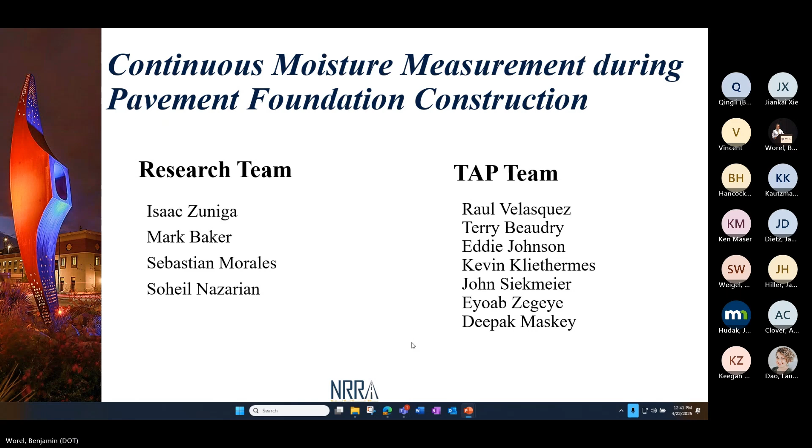Okay, sure. So given that background, our goal was to just put together a breadboard of a device, and this is not even a prototype. Breadboard is before prototype, right? A device that continuously measures moisture during pavement foundation construction. A good example of that is basically the asphalt roller density measurement device, which is very common now for asphalt. The same concept.

So there are several current pieces of equipment. These do a good job of telling you if you have moisture or do not have moisture. But keep in mind when we are building a base or a subgrade, we are talking about 1%, 2%. We are not talking about wet or dry. These are available, and they use them in agriculture quite a bit, but they were not giving us the accuracy that we need.

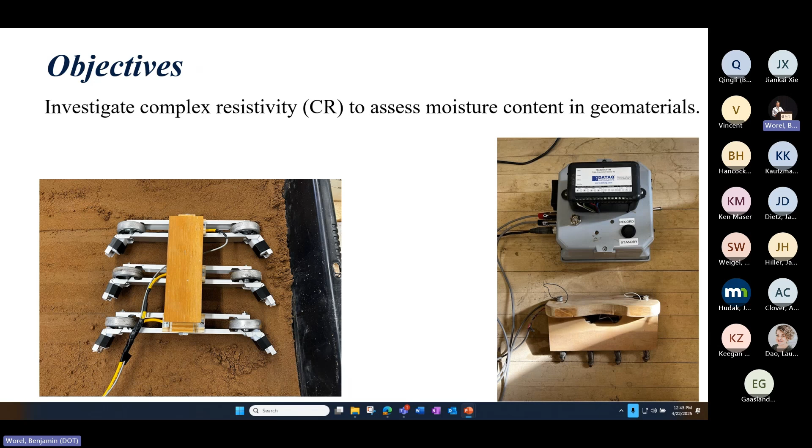So we started looking at something called complex resistivity. Resistivity, I guess, is available, but it's complex resistivity we measure. And when I say breadboard, that's what it is. These are low-cost equipment. That one is the laboratory setup to calibrate, and this is the field rolling system that we put together to see how it's going to go. Why complex resistivity?

It's basically a proxy for stiffness and moisture, because we know that moisture changes stiffness. So that's one good thing. We have a lot of experience with resistivity into the embankments and things like that.

I guess I promised not to show you equations. The fundamental equation of the moisture suction and complex resistivity is essentially the same differential equation. We're not going to solve it today, but the same principle that controls the moisture suction we want to know is the same principle that works with the complex resistivity. So if you know the degree of saturation, you can do a lot of good things, but it's not easy to measure. So what is it?

Those guys who do the master curves in asphalt, please wake up. What we are doing is basically injecting electricity into the ground, and we measure two things, the magnitude and phase. Does that sound familiar, master curve? What we would do is just change the frequency and follow the phase and the amplitude, the magnitude that we are getting from the resistivity.

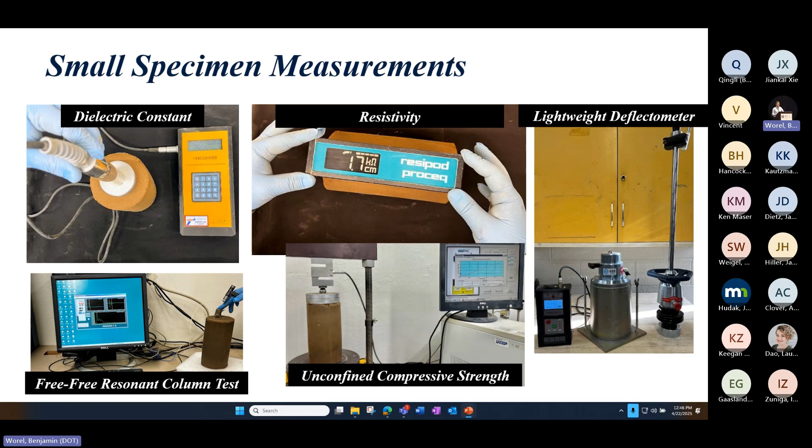So we prepared moisture density curve specimens at different moisture contents, and we just ran a resonant column for the modulus and then unconfined compressive strength. And then John Siekmeier showed up and said, why don't you look at the LWD as well? So we did that - that one has a different size specimen, a 6-inch by 8-inch specimen. Then just to simulate the field, we started making these drums and built materials within it, so it's a different compaction method, so that we can prototype it in the laboratory.

We got 6 different soils: 2 clays, 2 sands, and 2 gravels, and as you see, they are diversified. Plus, we started mixing one of the clays and one of the sands to see what the proportion does to the relationship, because when the soil is contaminated, you have to look at it. So this is what it showed.

We were not very happy with the dielectric constant - it basically relates a lot on the contact area, and these are triplicate specimens, so we are getting dispersion in the results. You see there's a nice relationship, but it vastly varies depending on the type of material you have. So there is not one relationship, but nevertheless they're related. The only one where we could not get good results was the gravel because of the size of the aggregates and the size of the specimen.

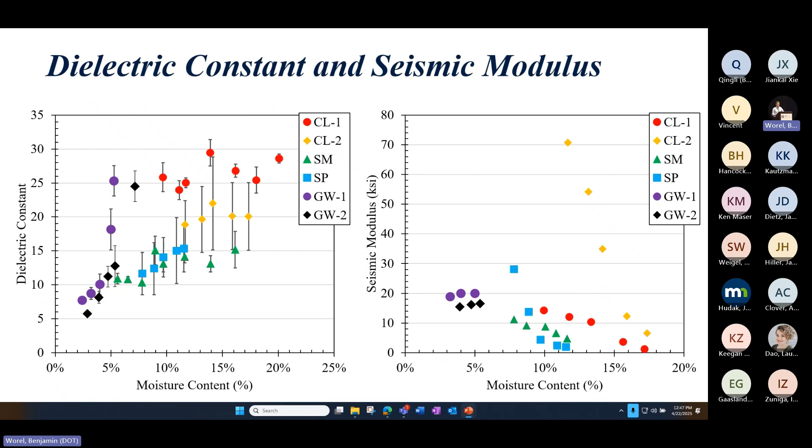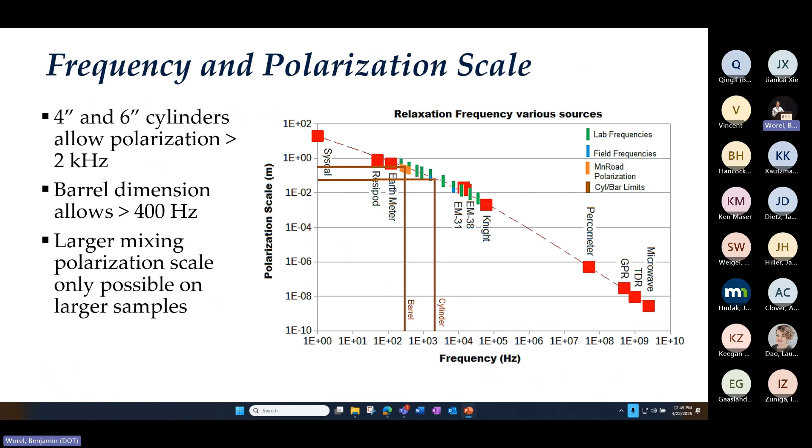It's basically, again, the master curve guys - what happens is the relaxation frequency is significantly different depending on the size. For the clays, they were long, and for the sands we were making 4x8, they were long enough that we would see a little bit of end effect. When we went to 6x8 for the gravel, we started to see that end effect. This is something trying to explain why the difference is there, and this is the theory we use to come up with a correction factor to go from the lab to the field.

The next thing, again, the inspiration was some of the work that Rosemary Knight did in geophysics. We want to go to the suction or degree of saturation. There's always a pesky thing: to get the degree of saturation, you need the specific gravity of the material. It's very difficult to get the right number, and if you don't, then you have a problem.

So we came up with a normalization. We call it the poor man's version of the degree of saturation. On the x-axis, normalized moisture content is the actual moisture content minus the OMC, divided by OMC, optimal moisture content. We did the same thing with the modulus or the resistivity: resistivity at a given moisture content divided by the resistivity at the optimal moisture content.

That was very good, because we can start collapsing the different types of material into one curve. So you always see that at 0 normalized is the OMC, you always get 1, and then you see that they're relatively collapsing into one curve.

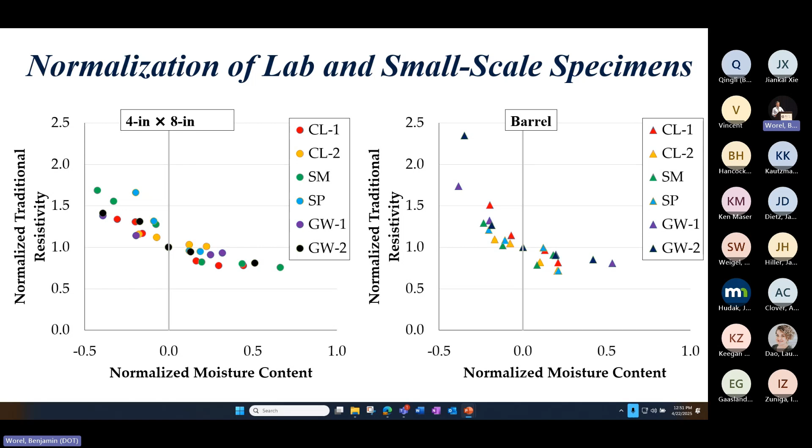Now I have the normalized traditional versus the normalized barrel. The shape is reasonably the same, so I can do some local calibration in the field after I get the numbers in the lab, and then I can predict the moisture content.

So what happened next? We went to the field with this, the first version, and we were not very happy with it. Then we built the second version, and we were a little bit more happy with it. But we have a problem here—we got a little disappointed.

What is the problem? Because of the distances, we want to see lift-specific moisture content—you don't want to see meters of soil. We have to have a small contact area. And when you go to the real construction, the contact area is rough there and so on, and we could not get it.

So we saw a lot of polarization, and the directions we anticipated, we really didn't like. That's what we were doing. The trends are there, but going to 1 or 2%, we could not see it.

So we started doing some diagnostics to see what it is. The electric contact was good—so I'm putting electricity in—but the contact area is very variable. So now the focus is different.

So we looked at different directions and speed and so on. One thing we saw at MnROAD, they are using RAP—they're putting 25% or 20% RAP in the mix.

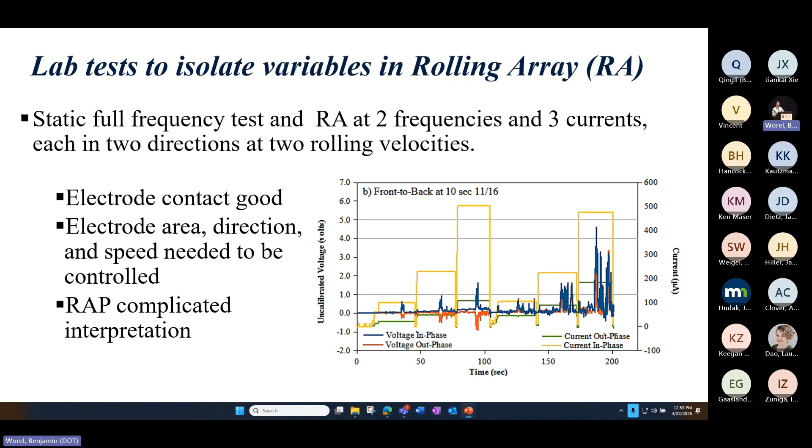So we have a problem. This worked great in the laboratory, but you go to the field and you have a problem. We did a lot of diagnostics afterwards. We were not too embarrassed to come and say, give us a phase 2—you only have one chance to make a good impression. So we did a lot of work trying to see what's there.

We concluded that if we make the wheel configurations bigger, we would not see the top layer alone. Or we could go smaller contact for the distances we need, but then we cannot get even pressure and even factor. So we started looking at some of the alternatives, and basically decided the way to go is to measure the capacitance.

Mark moved to Alaska, he retired, so he has plenty of free time during the winter, and we're just trying to revive it again. Sorry to be optimistic at the beginning and pessimistic now, but hey, it's good to know your limitations. Hopefully we're going to have a prototype to see what we can do.

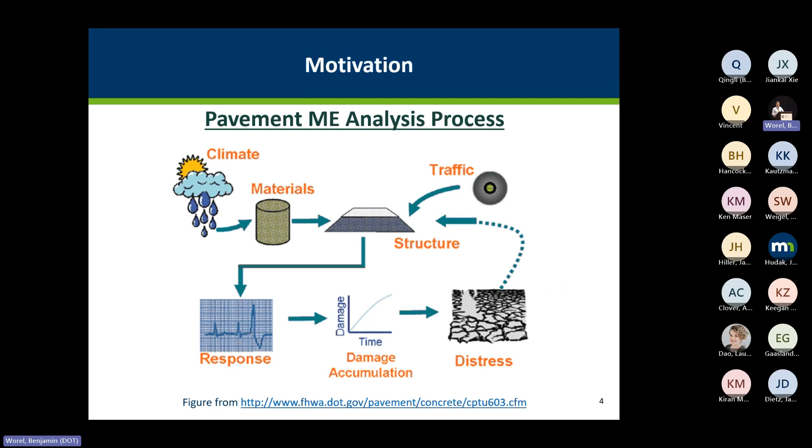The main material input in this study we focused on is the base layer, base course layers. So we collected whatever information that we can find out there that can be used as an input in pavement base course systems. The two specific ranges of materials we'll focus on are recycled concrete aggregate and reclaimed asphalt pavement materials, or recycled asphalt pavement material.

And these are the input data that we try to collect. As you can see, resilient modulus is one of the main inputs that needs to be used, and California bearing ratio, permanent deformation, shear strength parameters, and hydraulic conductivity.

And it was surprising to find out that there is not enough hydraulic conductivity data on these base materials, so we didn't really get much information on that. But index parameters we wanted to look into as well, because we tried to correlate these index parameters to shear strength and stiffness parameters, so it would be useful for pavement designs.

And we had two goals. The first one is really the collection of this material input. So we've gone through almost 80 reports or journal articles and all that, to extract all the information that had somewhat the data we were looking for.

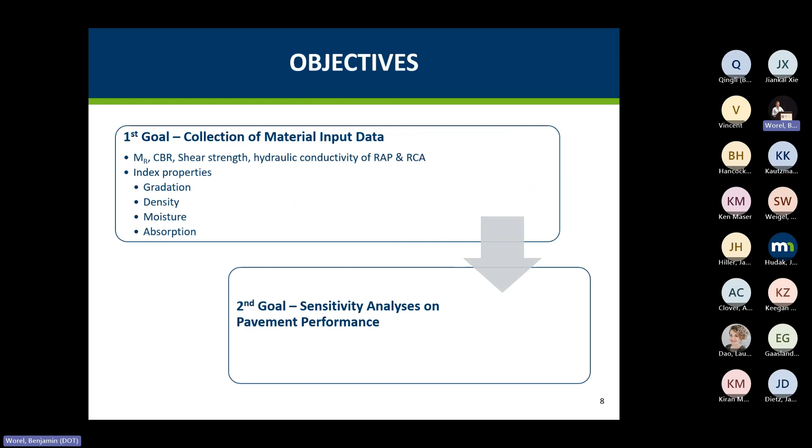Again, these are the list of parameters. At that time, when we were doing this project between 2020 and 2021, these were the states that were involved. Now it's expanded much more than that, so congrats to the NRRA executive team for expanding DOT participation.

And a lot of data here. Basically we've gone through all these 80-some reports, journal articles and all that, and tried to come up with lower limits for gravel, sand, fines contents, and related the minimum, lower, median, and upper limits for the resilient modulus test data, and also some other data like CBR. People ran a lot of tests on this and reported a lot of information, so what was that upper limit, lower limit, and median data for that.

So sometimes agencies or designers may not have all this data, so they can just go to this summary table and pick the number there, and it would give some sort of idea. Still, it wouldn't be perfect, but it would give you a database that you can pick numbers from.

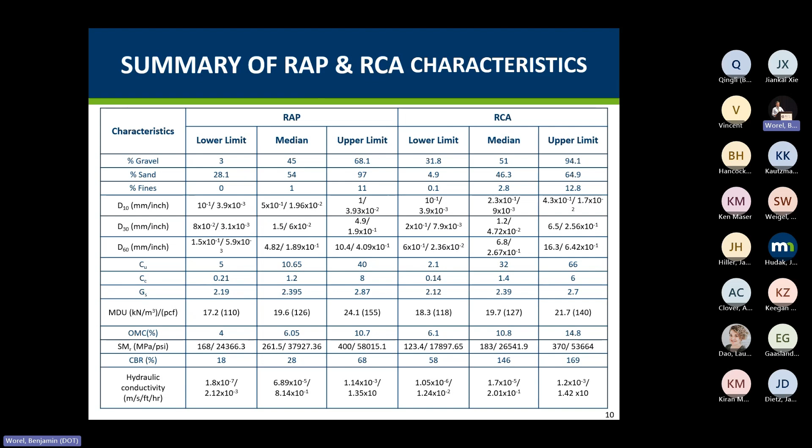We wanted to specifically focus on the resilient modulus data, and as you can see, the majority of people in this room know resilient modulus is a stress-dependent characteristic. So the soil doesn't have one resilient modulus value - you run these tests on different loading sequences and get this bulk stress versus resilient modulus data.

And of course, you can't put all this data as a whole into your Pavement ME design. You need a single value called the summary resilient modulus value, and for the base layers, what we use is the 210 kilopascal - that arrow shifted, sorry, it should be a little further to the right - it's 210 kilopascal, which equals 30 psi of bulk stress that corresponds to the resilient modulus value.

This is called the summary resilient modulus for your base design, and that's the MR value that you use as an input in your pavement design analysis.

So in this project, what we tried to do is correlate how this summary resilient modulus value changes with index characteristics. So can we get any relationship or some sort of correlation?

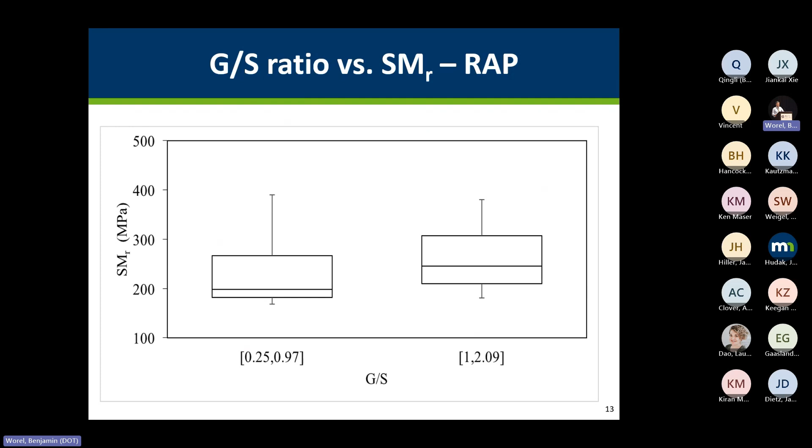And we plot these types of graphs - gravel to sand ratio versus summary resilient modulus value - and try to box it, to see, if the gravel to sand ratio is within this range on the left, the median value you would use is 200 megapascal. And if it's between this range, 1 and 2.09, this is the median value you would use - it gives you an idea. Again, I'm not saying you can use this as a perfect input and solve your problem, but this would give you a starting point and a good idea of where your input may work depending on your gravel to sand ratio.

Similar thing where we try to get the similar information for RCA material as well. And again, these are some of the ranges for RCA gravel to sand ratio versus resilient modulus. And again, D60, we did the same thing. These are the ranges that we provide, D60 versus resilient modulus value for RAP material, and similar thing that we did for the RCA material as well. As you can see, these are the ranges that can be helpful for you to pick your input value.

Unfortunately, we couldn't really find amazing trend lines showing that with an increase in D60 you get higher MR or gravel to sand ratio. It just doesn't work. So instead, we try to give these brackets. If your index parameter is in this range, this is the range of resilient modulus value that you would expect.

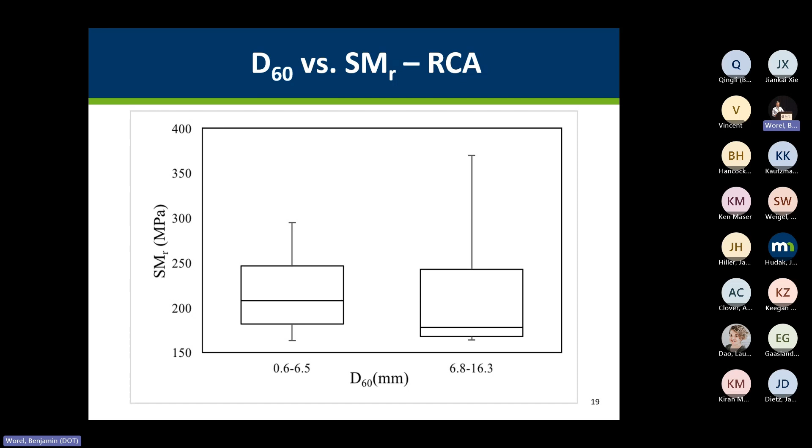And a lot of data, a lot of summary there. And we've done this for many other index properties and other soil characteristics. But if I put all those plots, it will take 50 minutes to go through all those graphs. So at the end of the day, just as a summary, index properties: in general, if you have higher D effective diameter size and gravel to sand ratio, it is likely to have higher resilient modulus value.

Of course, fines content, surprisingly in the RAP material, didn't seem to have much impact. I think the main reason is RAPs don't have much fines anyway, so the data that we had didn't really clarify. It's not like we changed the fines content periodically ourselves and ran the test. From the literature, we collected all this fines content data along with their corresponding resilient modulus data, and it didn't seem to affect. So with RAP, I think fines content is not that big of an issue based on our data. And again, these are some of the things. I won't go over all of them one by one.

Similar trends were observed with the recycled concrete aggregate with the gravel to sand ratio, so high resilient modulus. But with RCA, fines content can be a challenge. With an increase in fines content, you see a significant decrease in the resilient modulus values. One other thing with the RCA: when you increase the RCA content within your pavement foundation layer, it tends to decrease the hydraulic conductivity, and it can be an issue depending on what type of conditions you have. So that's what the study found out.

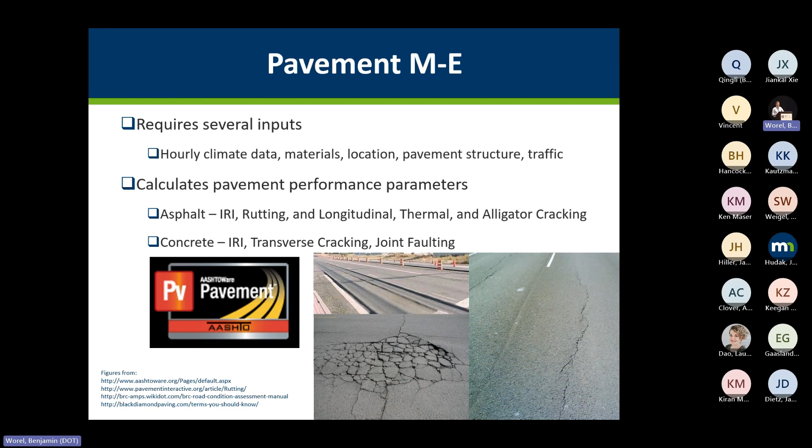These are the performance parameters that we looked into, and these are the general inputs that we used. We checked these inputs with our TAP members as well, and we thought this might be representative of the NRRA DOT participants at that time. These are the other traffic inputs that we used, the low traffic values based on our discussion with TAP and also previous literature. When people do sensitivity analysis, they run their tests within these traffic ranges.

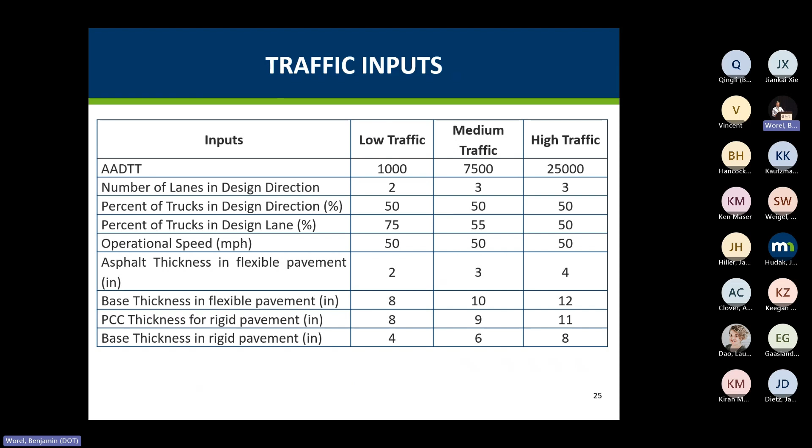These next few slides are a bunch of graphs that show the impact of resilient modulus variation on flexible pavements. Of course, low traffic had the least impact. An increase in traffic caused an increase in the deformation and the distresses. One thing that was surprising, especially in the low traffic conditions, IRI didn't seem to be impacted much when you use the RAP, and the stiffness of the RAP didn't seem to be impacting the IRI values much.

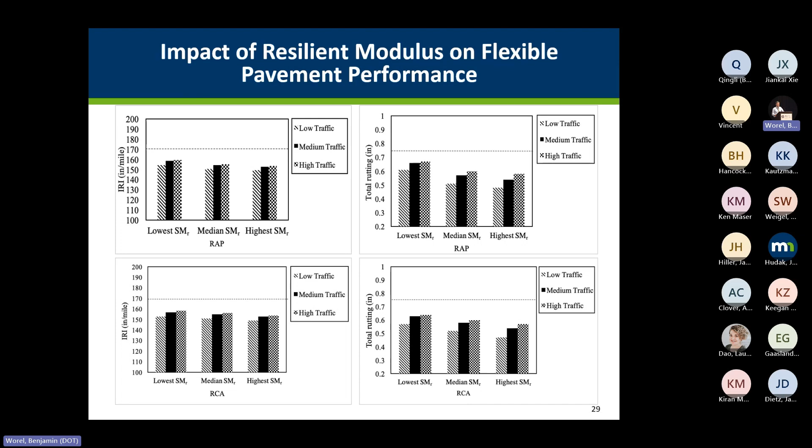And with the total rutting, depending on the conditions, we see a lower trend with an increase in SMR. We saw a slight decrease in the total rutting, and RCA had similar trends. The similar analysis we conducted for the impact of resilient modulus on rigid pavement performance. Again, traffic, of course, makes sense. An increase in the traffic increases the distresses. No brainer there.

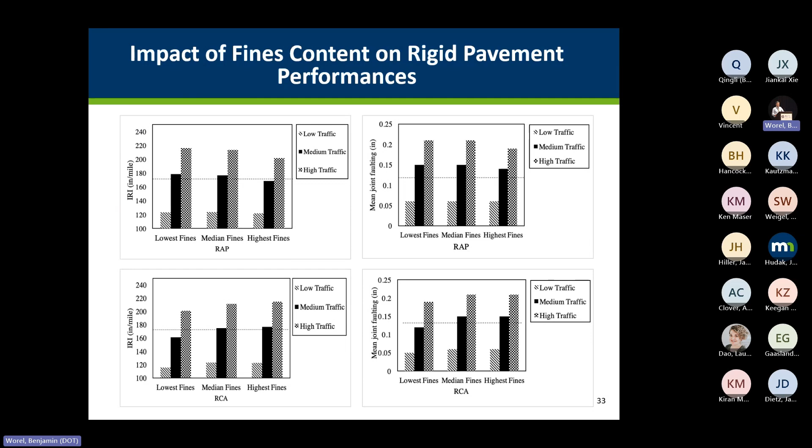And the same thing with the rigid pavement performance, both for the RAP and RCA material, an increase in fines content in general caused a reduction in the IRI and mean joint faulting performance. Overall, these are some of the lessons that we learned. I didn't provide all the data here. Fines content was one of the most impactful parameters in the pavement distress predictions. And surprisingly, of the index properties, D60 was definitely not providing any trend, and some other index properties didn't seem to impact it as much either.

These are some of the implementations. Actually, we have a recent project funded by MnDOT LRRB looking into the second item there, to recommend and determine the gradations and summary resilient modulus values, along with drainage and other things that need to be taken care of and studied in more detail. So these were some of the analyses, and the rigid pavement results were not conclusive. Ben may have a much better idea about it. Again, a rich database was created, so it was a good start to give guidance to pavement engineers.

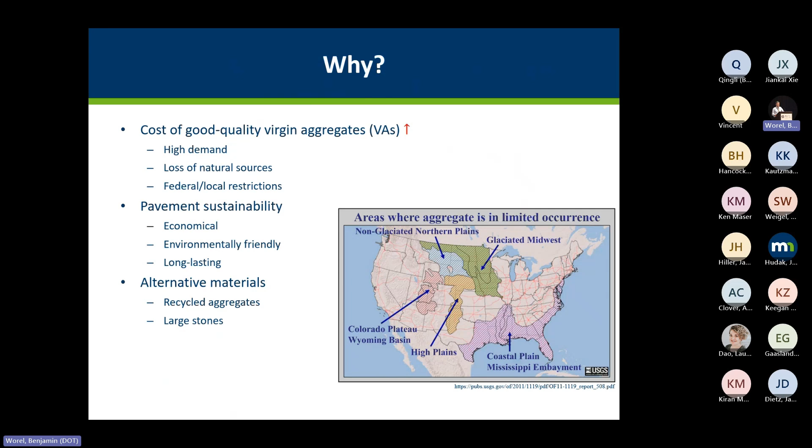And with this, competition comes. It's not only pavement engineers using the aggregates, also construction engineers, buildings, dam constructions, bridge constructions. Everybody needs this aggregate. The sources are scarce, and competition is high, so they are getting more expensive. The use of recycled materials definitely makes sense to replace some of that demand.

As a result of this, three materials were the focus of this project. The first one is recycled concrete aggregate, and the second one was recycled asphalt pavement. In addition to the laboratory tests, we built test sites on MnROAD to monitor their performance for a long period of time.

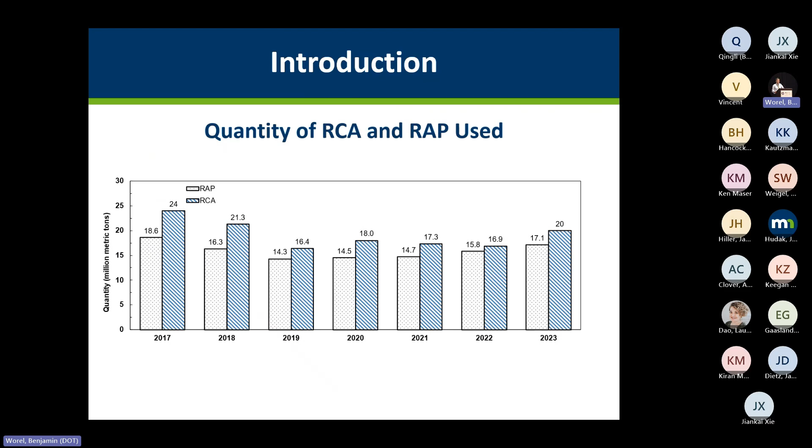So you have a lot of competitions, but especially if you want to use it in the pavement systems, you really need to understand their limitations, so how they can be used. Can they be used just like we use the natural aggregates? And again, at that time there was information, but it wasn't as specific as what we've done in this study. And there were some limitations of the laboratory facilities, especially with large stone subbases, how to determine their gradations and their performances and all that. So this study tried to answer all those unknowns.

And we had a total of 11 test sites. These are the recycled aggregate bases. We have 12-inch thick coarse RCA material, meaning the gradation of this RCA was coarser. And then we had the 12-inch thick fine RCA; the gradation of these RCAs was finer. And then limestone is a natural quarried aggregate that we use, no RCAs or anything. And RCA RAP was another 12-inch thick material that is a mix of RCA and RAP materials.

And class 6 aggregate, and especially class 5Q, has a lot of RCA in it too, but it is called class 5Q and class 6 aggregates by MnDOT, Minnesota DOT. Then we have our 18-inch thick large stone subbases and 9-inch thick large stone subbases, and 4 of these 9-inch thick large stone subbases had biaxial geogrid, biaxial geogrid plus geotextile, triaxial geogrid plus geotextile, and triaxial geogrids.

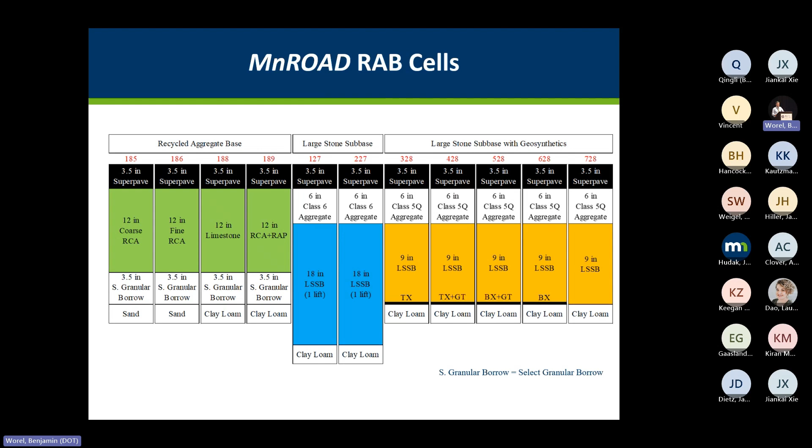Again, I'm not sure if I will have enough time to cover how geosynthetics are put in between, why it is decided to put geosynthetics between large stone subbase and subgrade, but happy to talk about it during the break.

We have three main goals. The first one was really to start with the field performance. Usually we start with lab, but the project was built before we started running the laboratory tests. So we started with the construction field performance, then determined the index properties of these materials, and then prepared a pavement design and construction specification guideline based on the outcome we got from these two main goals.

Again, the content of the project was quite big, and today I will mainly talk briefly about construction monitoring and laboratory testing, and long-term performance monitoring. We still have these test sites, thanks to MnDOT and Ben for not getting rid of them. They are still collecting the data, so we have data from the last 8 years, which is not very possible if you don't have such sites in MnDOT. So it's really showing us the long-term performance of these materials. And we'll talk about instrumentation a little bit. Probably I won't have time to talk about the pavement design criteria.

So these are the list of the laboratory tests that we have conducted: index properties, saturated and unsaturated properties, thanks to my colleagues at University of Wisconsin, Dr. Likos and Dr. Edil. Unfortunately, I won't be able to touch base on the permeability and unsaturated results in today's presentation. And we have developed an imaging tool that you can use to determine the gradation of large stone subbase materials and also their angularity and sphericity.

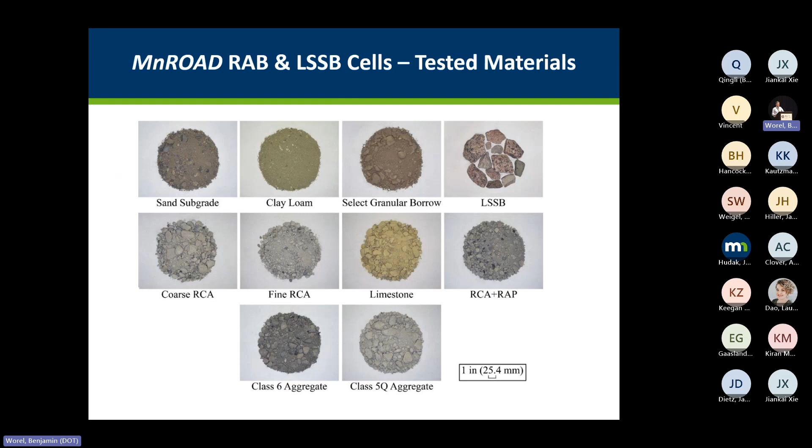And these are the pictures of the materials that we have tested and used. A wide variety of materials, and LSSB, as you can see, is a very coarse large stone subbase, and the other materials are pretty much the same, except of course the clay loam subgrade and sand subgrade have different gradations. There is a lot of information here; except the clay soil and the large stone subbase, the gradation of the materials was within the acceptable criteria to be used as a base layer in pavement foundation systems. And again, we have a whole paper on this gyratory compaction, but I won't show any results.

One of the things that we observed, especially with coarse RCA and RCA RAP materials, is that compaction is important. If you try to reach that 95% compaction degree, these RCA materials change their original gradation significantly. So that's one thing that needs to be studied further. Really, what should that adequate compaction degree be?

Because especially with coarse RCA, we saw this. When you apply this compaction on it, it really changes the original gradation significantly. So that part is very important.

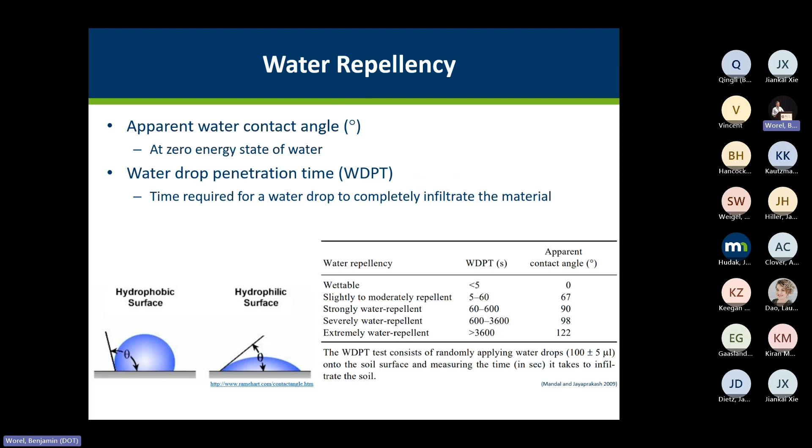And water repellency: with my great colleague, Dr. Daniels, we have a whole project on making the soil hydrophobic. Basically, we don't use Rain-X, but whatever Rain-X does on a car windshield, we do it on a soil with an organosilane chemical. We put it on a soil and it makes the soil basically hydrophobic, water repellent. But with RCA and RAP, we also wanted to look into this. Are they hydrophilic or hydrophobic? Because depending on that, the gradation and the permeability of these materials may change significantly.

And what are the lessons learned from laboratory testing? The majority of these materials that we use are non-plastic A-1-a materials that fit the gradation requirement that you can use in pavement foundation systems. But absorption was the highest with RCA materials as expected, and the finer the RCA, the higher the absorption. And actually, I don't know if I put it in these slides, but for absorption, we put a limit on the absorption value. If it is outside of those ranges, this study recommended not to use those RCAs.

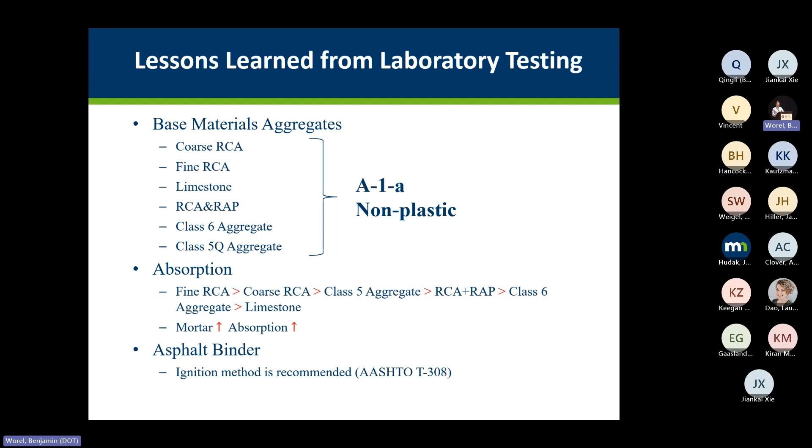And with the asphalt binder test, the ignition method was the recommended one to really get the actual RAP material. Again, I couldn't show the results here, but Class 6 and Class 5Q had recycled materials in them. They had similar properties: Class 6 aggregate had more similarity to RCA RAP, and Class 5Q had more similarity to the coarse RCA. And we didn't get to this, but the hydraulic conductivity of the coarse RCA, fine RCA, and RCA RAP was higher than the limestone.

But this was before you apply all the traffic load and all that. I think with this new study coming, we will look into the long-term hydraulic conductivity changes of these materials as well. And for the abrasion limit, when you use RCAs, the abrasion value increases a little bit. And again, we observed higher abrasion for recycled concrete aggregates.

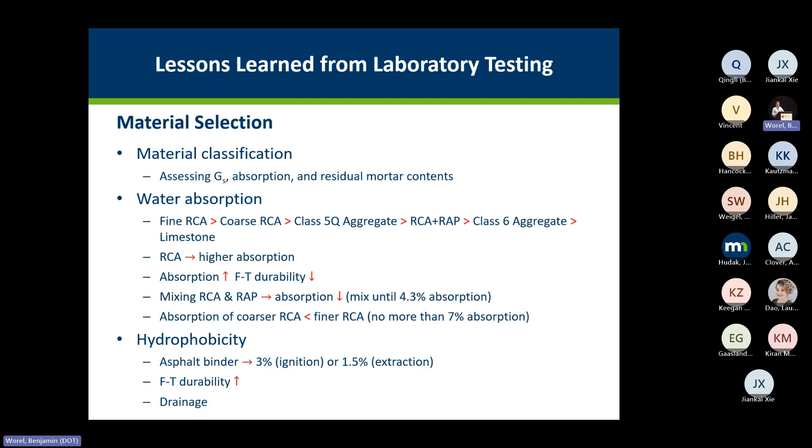And again, water absorption is one of the parameters that we really wanted to focus on. That needs to be limited, as we mentioned, with RCA and RAP. We wanted to keep that absorption value below 4.3%. And for coarse RCA or fine RCA, we want to keep that absorption value below 7%. These are some of the main lessons that we learned and provided as suggestions.

Another lesson learned from the laboratory testing with RCA: there are a lot of unhydrated or rehydrated cements. When you put water in the system, it cements and can cause some drainage issues, so that's the part where you need to be very careful, and mixing it with RAP can help to overcome this problem. And disintegration of these mortars on the aggregate samples is another thing that needs to be carefully taken into account when you use recycled concrete aggregates. A similar problem was not observed with RAP materials.

And do I still have time quickly? Okay. How much? 10 minutes? Okay. Oh, I talk fast, I guess. Sorry, I hope you understand what I'm saying.

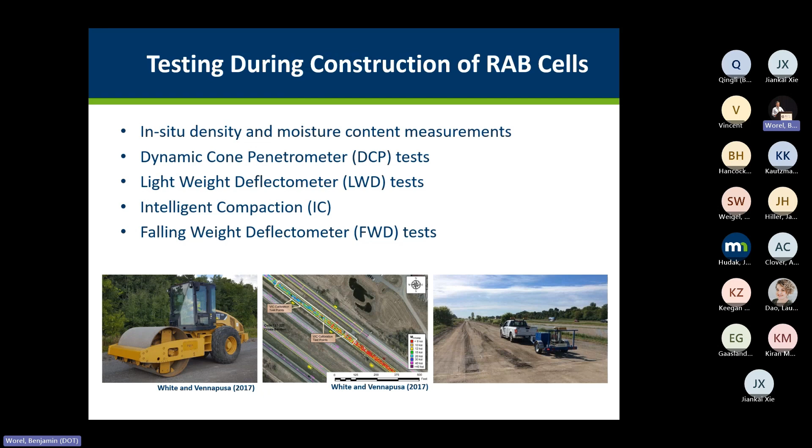First, I will talk about the testing during construction of the RAB cells, recycled aggregate bases. At that time, the MnDOT crew collected all this data: in situ density, moisture contents, DCP, LWD, intelligent compaction, and falling weight deflectometer tests were conducted on each layer of the test sections.

When we get to the performance monitoring of these cells, a lot of soil temperature and moisture sensors were installed at the test sites, so we could monitor temperature and moisture changes throughout the season, and we're still collecting it last I checked.

When I say we, I count myself as part of the MnDOT crew. I bother them too much, so I kind of say we, but it is really the MnDOT people.

I really appreciate they keep collecting this data for us still. And periodic FWD tests. We did some frost heave and settlement monitoring in the beginning, but then didn't continue that. We also have rutting, IRI, and pavement distress data.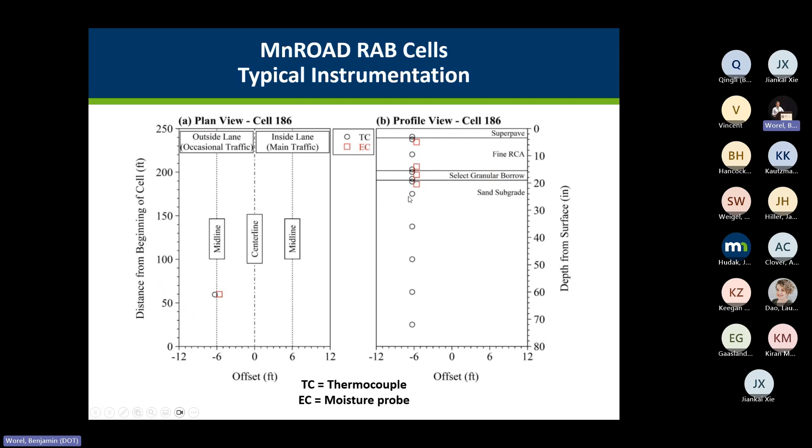Here is the plan view of one of our cells that has the sensors on the outside lane. And here are our thermocouples and moisture probes that we put through the depth of the pavement systems. And we collect air temperature as well.

I reported the data here until towards the middle of 2019, because we had to wrap up the task reports and the final report and all that at that time. But we still have the whole data all the way to 2025.

Then we look into the freeze-thaw performance. We created these isotherms to determine what is the freezing period and thawing period for each of these base materials, as you can see. And we have a summary table here.

As you can see, I put a note there. I know there's a lot of information, a lot of numbers there, but the thawing periods were higher for RCA. So if you have spring load restrictions and all that, and you know that you have an RCA layer under there, you may have to wait a little bit longer to open that road to heavy vehicles, because the thawing period is a little bit higher for the RCA layers than for the original aggregate materials.

But the other problem is that RCA doesn't have what the limestone, the original aggregate, has - it allows the frost penetration to go deeper. RCA, we didn't get fully into it, but probably because of those rehydration reactions and all that, it kind of acts like an insulator to keep the depth a little bit on the surface of the pavement systems, and doesn't allow it to go through the full depth of the pavement systems.

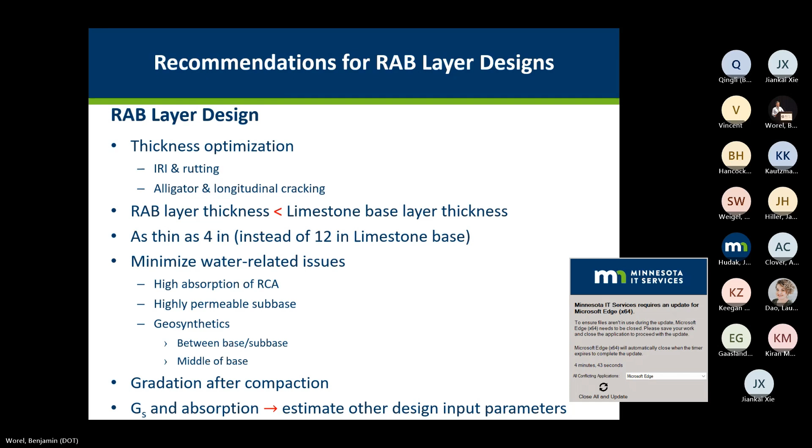The next thing we've been working on, what we did last October with the MSU team and the MnDOT team, and Raul from the MnDOT Materials Research Office, is we started collecting Shelby tube samples. Thanks to them, they cut a strip on some of these test sections, and we were able to get soil samples from the subgrade all the way to the base layer to check chemically what is happening there. So we're running hydration tests and environmental leaching tests to check how the calcium concentration and pH of these materials changes.

There are some environmental concerns about using recycled asphalt material or recycled aggregate materials in the base layer. We looked into the 10 feet next to the shoulder, and another 10 feet on the other shoulder. Now this spring, we will collect other samples in the back slope and foreslope at certain depths to check if the pH of those soils, when you use RCA, has any impact. What are the pH values of those back and foreslopes, to show that, hey, you use this RCA material which is basically concrete and has high pH, but it's been 8 years and the pH value was not even close to 8 or 8.5, which is the upper limit that EPA sometimes enforces.

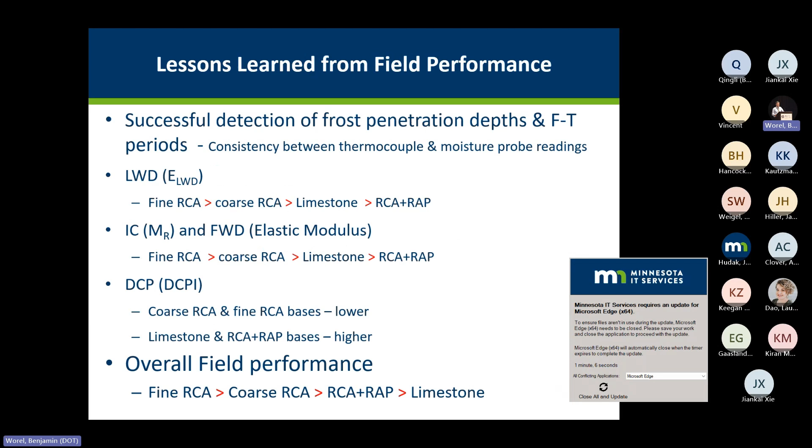Yes, that was a struggle since we finished this project. It's something that we wanted to address, so we started addressing it. Sinan, feel free to chip in. I didn't have the graphs here, but we looked into the degree of compaction's impact on hydraulic conductivity. I don't know if we did it for gradation, but that was something we wanted to start in the lab first. We have the hydraulic conductivity data, but we didn't do the pre and after gradation.

I don't remember, but that's something that needs to be done first. Then you compact it, you have this energy application in the field, how it works. So instead of a Proctor hammer, that's why we use gyratory compaction, because it simulates the cylinder drum's pressure better than the Proctor hammer that you put on the soil. So that's why we do gyratory compaction at different gyrations, to simulate field conditions, and then look at the gradation changes, and from there suggest, hey, 200 gyrations equals this amount of compactor passes, so you don't compact anything further than that so you don't have these huge gradation changes. But it's all speculation - I don't have the data at the moment, but that's the path we would go with. Anything to add, Sinan?

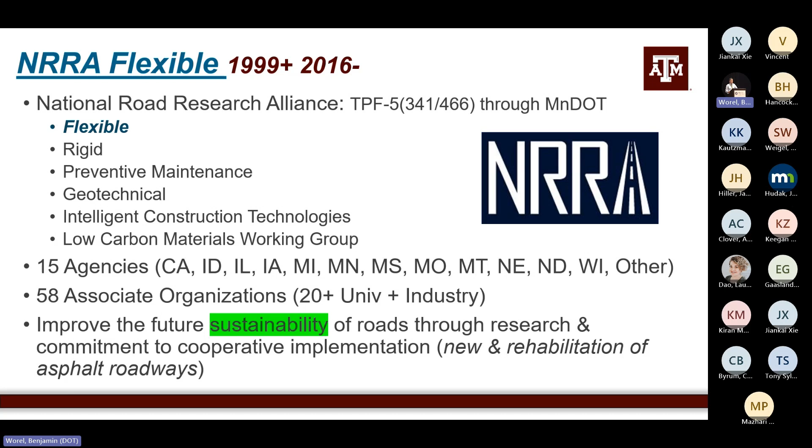Just some of the numbers in terms of the funding. There are different buy-in amounts for the agencies depending on whether it's an SPR compared to Minnesota, so either 75,000 or 150,000 a year, and then each of those associate members pays 2,000 a year. So there's about $1 million a year that goes out to the research projects.

50 research projects were completed in the first iteration, 11 of them in hot mix, and then 29 research projects started up with the second iteration, with 11 of them being hot mix - so about the same number.

Generally, the projects are around 2 years and $150,000, and of course this is heavily involved with the MnROAD test track sections. There are also monthly team meetings, seminars, virtual seminars paid for by research funds, and travel funds for members to attend TRB and this meeting.

In terms of the completed projects, I want to focus on the sustainability projects, but I don't want to skip mentioning some of the other completed projects by the flexible team. There's some on construction and structural design covering milling, smoothness, joints, and tack.

Performance testing in BMD - there have been a number of them which I think tie straight into sustainability, including adding rejuvenators, polymer modification for newer cracking tests, loose mix aging for how to incorporate loose mix longer-term aging for cracking tests in BMD, and the reflective cracking challenge with HMA overlays on rigid pavements that Ishan mentioned earlier.

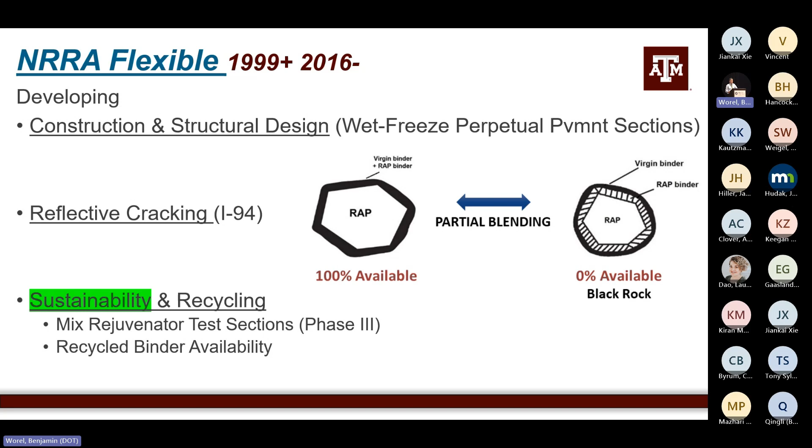Okay, next on to CAPRI. CAPRI is only a few years old, so definitely needs the experience of the NRRA group. In this case, it's also a pooled fund study with a slightly different number in parentheses through Alabama DOT as the lead state, and Auburn is sort of the organizing entity. There's 4 subcommittees that I'll talk about in just a second: critical issues, technology evaluation, technology transfer, and research roadmap. In this case, there's 32 agencies.

So there's actually, I would say, about double the number of state DOTs or state highway agencies, plus FHWA. And then there's about half of the associates, including 10 contractors, 8 industry associations, 5 materials suppliers or equipment manufacturers, and 3 universities. So sort of a little bit flip-flopped in terms of the number of members from the different groups.

The mission with Capri is to improve asphalt pavement cost effectiveness, sustainability, keyword, and safety by addressing knowledge and research gaps in the industry, including developing research needs, providing technical guidance, facilitating small scale studies, and fostering implementation. So implementation, again, is a focus. The 4 subcommittees are shown here.

The critical issues subcommittee identifies and prioritizes aspects of asphalt pavement performance and sustainability, and identifies gaps, hurdles, and unclear aspects in existing policies, procedures, and practices. So once those are identified, it sort of moves along to other subcommittees, but they're all sort of integrated. So this was set up in a different way, if you will.

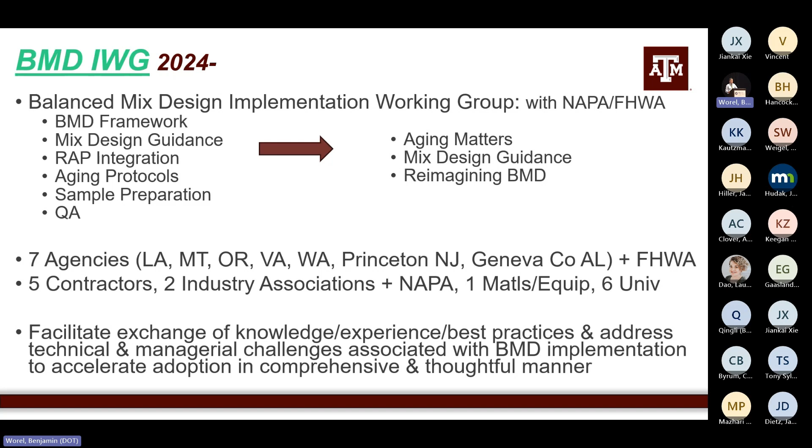So there are also, like I said, in-person and virtual meetings. I think we're trying to meet once a year in person, once a year virtually, again, with travel funding available for agencies and university personnel. And the products that have come out so far include an Aging Matters 2-page tech transfer document. Why does aging matter? Fan was involved in that. The Mix Design Guidance, which I'm going to show a little bit more on. It's an infographic web page and a PDF document.

And then Reimagining BMD, there's 2 parts to that. There's a white paper that says why do we want to reimagine BMD from approach A, B, C, D to now tier 1, 2, and 3. The idea is that it's a process. You don't just pick one level A, B, C, or D and stop, it's a process that you go through. And they've also drafted an AASHTO standard practice by distress type, including rutting, multiple types of cracking, moisture, and surface properties like friction.

So I believe there's a link to the BMD implementation working group on the NAPA BMD resource guide page. And some of these things are up there right now. There's a few things that need to be revised, but there's going to be a webinar on June 4th that's going to be talking about these products.

Just moving on more generally for sustainable asphalt pavements. Again, I'm focusing on hot mix, even though I mentioned some other cold recycling types of efforts. When we do these high RAM mixtures, and what I mean by that is RAP and/or RAS, with 0.3 to 0.5 recycled binder ratios, we're creating a cracking problem with our stiff, aged, brittle RAP. And so sometimes when it gets high enough, we've got to do something about it.

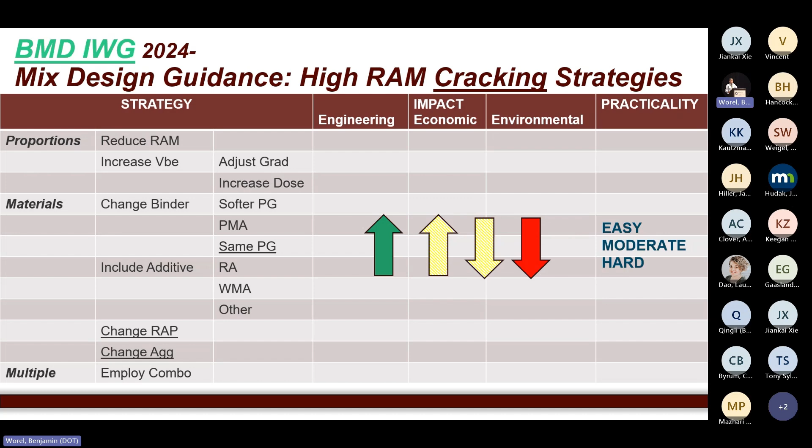So we've got these three groups. They're all very good efforts. They're all organized slightly differently, have slightly different missions, and are going about things slightly differently. But I think it's really important that we understand what everybody else is doing so that we're not reinventing the wheel. The NRRA has more associates and university members, and it's also part of a larger effort. The flexible team is just one part of that larger effort.

CAPRI has more state highway agencies, and it's organized by the process. And the BMD IWG is smaller by design, tries to have a balance of different members, and it's organized by product. Now that we have those first four products from the three task groups, we just reorganized ourselves, and we're moving towards laboratory versus plant results for BMD tests, sample preparation or specimen fabrication guidelines, and methods to set the criteria for those BMD cracking tests. So now we're reorganizing according to the products and moving forward.

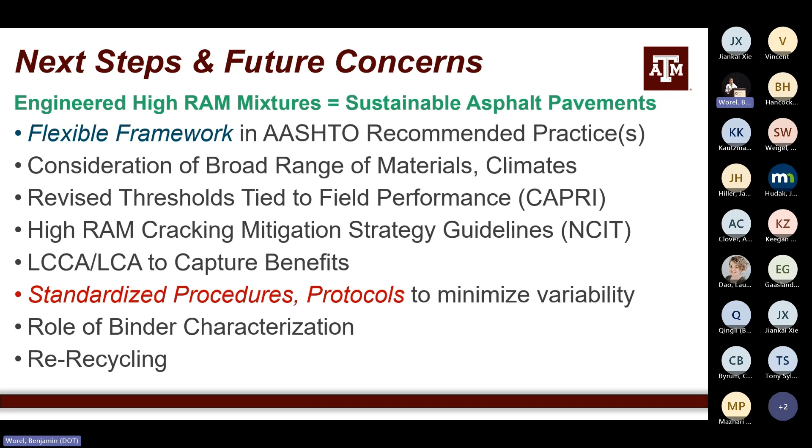And then we also have to be concerned about re-recycling. So that PG high of 127 is sort of a glimpse to the future, I think, of recycling. So the more times that we do this, we're going to continue to get even stiffer materials. So maybe we just got to be ready with our strategies to restore cracking resistance, but also safeguards to maintain rutting resistance.

I don't know. One idea is to have a liaison across these three groups. I also think it would be good to have a well-crafted survey. I know everyone doesn't like surveys, but something to help us understand what are the needs of the agencies and what are the concerns of the industry. And then I think we should still keep focusing on products. Like, it should be product-based.

What are we getting out of this? What's practical, and what can we do in the short term? Not that we shouldn't be looking long term, but what can we do right now to move things forward? Because we're jumping in the pool. We're sort of done talking about it, and we're jumping in the pool. And so making sure that we have the tools to do that.

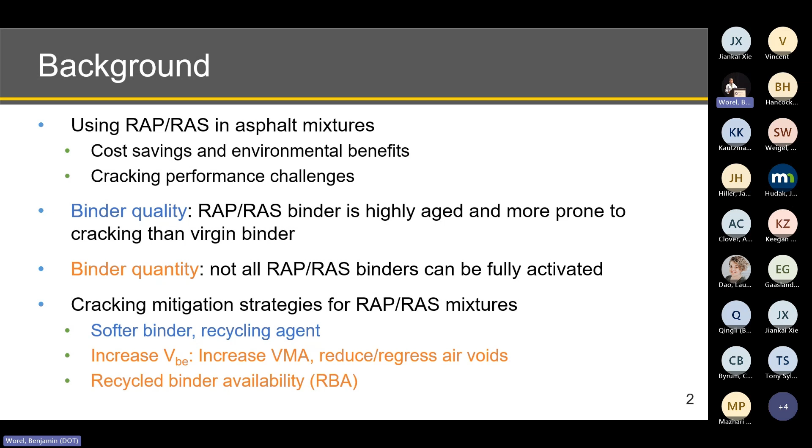First thing first, what is RBA? Before we get into detailed discussion, we want to make sure we're on the same page about terminology. One thing I learned from Dr. Epps Martin when I was at A&M is consistency. One time one of her students told her she said in a meeting, I don't care what you do, but you got to do it consistently. But I promise that was not me. Anyway, if you look at what I'm showing here, this is a definition we have been using at NCAT.

This is on the ongoing NCHRP project. It actually came out of a study that Amy and her team did a few years ago for TxDOT. It says the amount of recycled asphalt binder from RAP and RAS that activates and contributes to the total effective binder content in asphalt mixture.

Basically, it goes back to what I said earlier: you do have asphalt binder on those materials in the mixture, but now you want to find out how much of that binder is available, is active. Is that going to be 100%, or is that going to be 50%? That's really what we are going after with the RBA concept.

RBA is often expressed as a percentage, ranging from 0 to 100%. It's almost like two extremes. When I talk about 0% RBA, that means all the asphalt binder in RAP and RAS cannot be activated, and therefore those recycled materials behave like a black rock. That's the most extreme situation. We know that's not the case, but that's just one extreme.

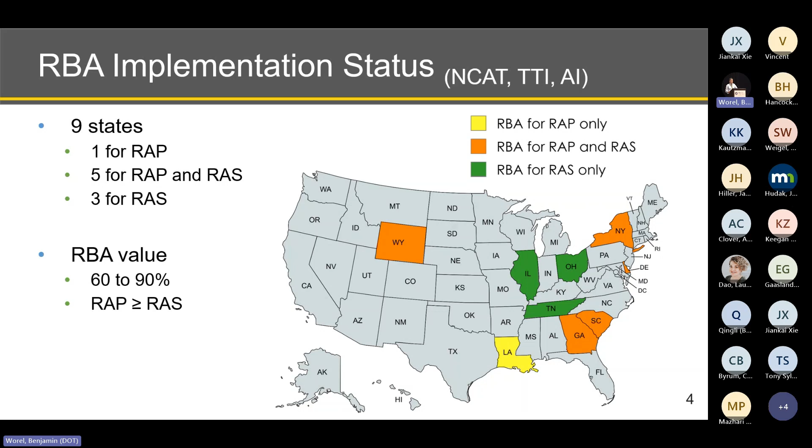The other interesting part we recognized by looking at what the states are doing is that the majority of states require a higher RBA for RAP as compared to RAS. I think that's also not surprising, goes back to what I said earlier that RAS is much stiffer and more brittle. So even though it's part of the recycled material, RAP and RAS are two different animals, and I think everyone in the room would agree on that.

So the question you may be wondering when I show you the number is, how do we determine that number, 60, 80, whatever you want to call it? As part of the NCHRP work that NCAT and TTI are working on, we did a very comprehensive literature review, looking at what has been done on this topic in the US and outside the US. We organized them into a list here.

The first reaction you may have is, hey, that's a pretty long list, right? Several years ago, at TRB or AAPT, everyone was talking about the different cracking tests, and we said we got too many options. Unfortunately, it's the same thing here—too many choices, as they do not always give the same result.

If I pick a method here and another method down the list, and apply the test methodology to the same material, I could get different answers. There's a reason for that: the principles of those different methods are very different, so they are measuring different things. Some are more focused on the degree of blending between recycled materials and virgin material, some are more focused on the mobilization of those materials. So it's really comparing apples to oranges, and that's why we're getting different answers.

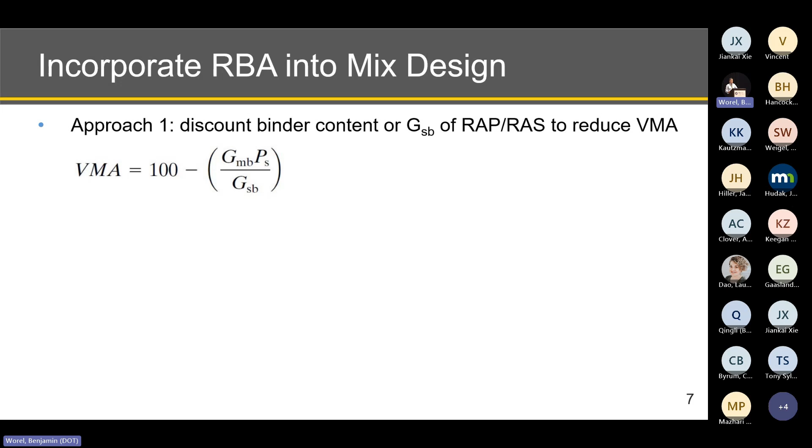The first approach is that you're going to discount the binder content or the GSB of the RAP and the RAS, so that when you do your VMA calculation, you're going to mathematically reduce your VMA, okay? I just want to give an example to illustrate the concept here.

Let's assume we have a 35% RAP mixture with 5.7% total AC, with 3.8% coming from the virgin material, so the difference, 1.9%, coming from the RAP. Let's assume the RAP itself has 5.4% binder content based on ignition or solvent extraction, whichever the DOT is using for its standard practice. And you do your VMA calculation and you got 15.7%. That just gives you the VMA at 100% RBA.

Now I'm saying, hey, we know 100% is not realistic. I'm going to apply a 25% discount factor on that binder content. So that's why you see the number of the binder content dropped from 5.4 to 4.1. And then you do the same calculation. If you look at the number on the very right side, your VMA dropped from 15.7 to 15.3, okay?

If I want to go a little bit more aggressively on that discount factor, saying only 50% is available or is activated, then your VMA number dropped further to 14.9%. So now you see how it works. All it does is play with the volumetric system so that you can mathematically drop your VMA. And what it does is eliminate that existing mixture with marginal VMA. In this case, if your VMA minimum requirement is 15%, then obviously with a 50% discount factor, that mix design is not considered passing. You have to go back and readjust.

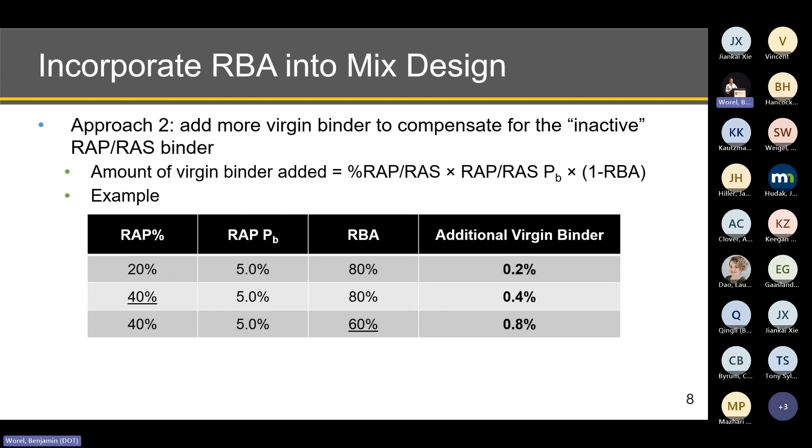What if I increase the RAP content to 40% for the same RAP? In that case, you're going to double the amount of virgin binder, okay? If I lower my RBA number, saying instead of assuming 80% available, I assume 60% available, the additional virgin binder further increases. So this is just the way the DOTs over there are addressing the recycled binder that is not available.

Obviously we know with additional binder added into the mix, it's going to provide better flexibility, durability, and cracking resistance, right? And this approach is often known as COAC, the corrected optimum asphalt content approach.

Some of the benefits of the RBA, especially reported by Georgia DOT and South Carolina DOT, include better compaction, reduced segregation, more uniform surface texture, and significantly improved cracking and moisture resistance. So overall, if you talk to the DOT and the contractors over there, they are on board. They have been very pleased with the performance of their mixes after they address RBA using this approach.

And you may wonder, hey, what happened on the rutting side, right? I thought for asphalt pavement we need balance. So you got better on the cracking side, which is great. What about the rutting? In those two states, they don't have rutting issues, okay? They consistently get passing Hamburg and APA results.

But the one thing that is interesting to mention is that both states use hydrated lime. It's just kind of the history of what they have been doing. And also they do not use softer binder or recycling agent, at least at this point, to address this.

So I think this is important because there are different strategies that we can use to improve the cracking resistance of the mixture. But if we go beyond a certain point, we could create another imbalance issue and bring rutting back into the picture, and that's what we don't want. So it's important that when we try to address cracking, we need to make sure our rutting resistance is still there, okay?

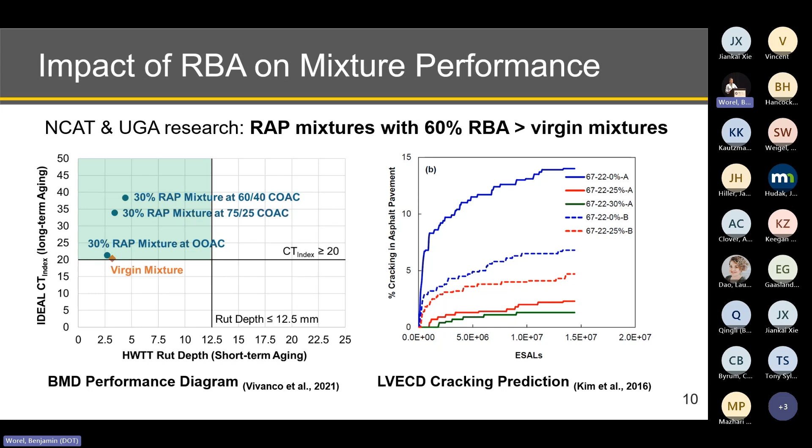Some of the work that we did at NCAT and also University of Georgia, based on lab testing data, including some of the index tests and fundamental tests, consistently shows that mixtures with 60% RBA can perform even better than the virgin materials by using that 60% RBA approach. So I think that goes back to what I said earlier: you recognize the amount of binder from the recycled material that is not available, and you add additional virgin binder to address that. So this agrees really well with the field performance.

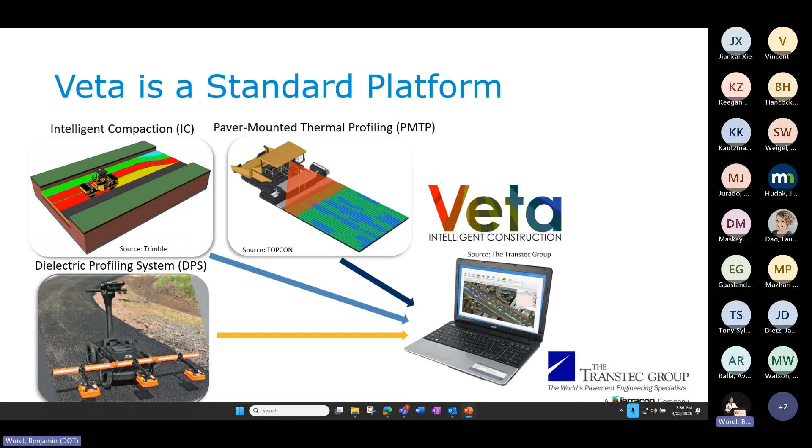And I know I am speaking to a mixed congregation here. So if you are not an asphalt person, that's okay. The big thing to know about asphalt is that density is super important. So think of density as the ultimate quality assurance metric that we're looking at when we're constructing asphalt.

So a little history of Veta. Where it came from was actually early 2000s. There was a lot of work going on with intelligent compaction, and there was a need for a standard place to view the data, a place you could pull in the data and look at it. It's all geospatial data, but just the mapping capability, being able to see it and filter it and analyze it, was a need.

And there's a lot of different equipment vendors. So having one standard place where it didn't matter where the data came from, but you could look at it the same way, was really important. So it was originally funded by FHWA and MnDOT, and it supported all of the data coming from the intelligent compaction vendors.

Since then, it's grown a little bit. As some of these other technologies have come onto the market, it was sort of like, hey, that would actually be really cool if we could bring that into Veta too, because then we're able to start putting all of the pieces of our puzzle together, right? So I always call Veta the ultimate quality assurance tool, because you really can get all the information that is not readily available otherwise. And I'm going to show case studies and try to prove that to you in just a few minutes.

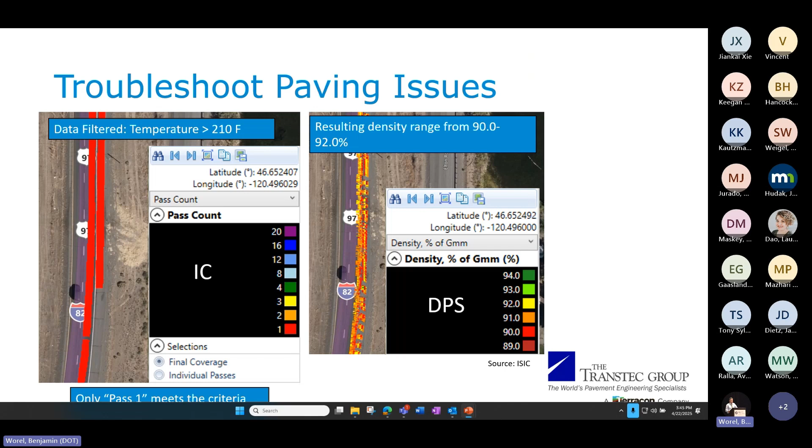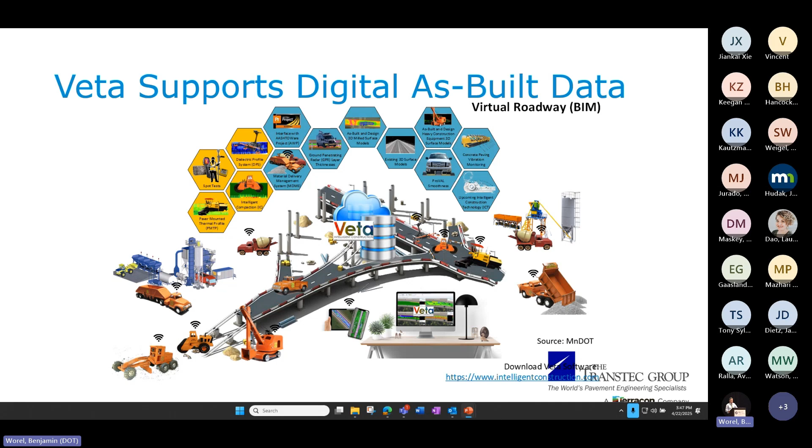Just adjacent to those yellow shapes are the material delivery management system, which Rebecca is going to tell us all about, and the interfacing with AASHTOWare Project. So that is on the horizon. We can see that coming. And then some other things that, wouldn't that be great to bring in? You know, if we could bring in pavement smoothness, GPR thickness, 3D surface models, just tons of different ideas of really just building up this quality assurance tool that we have.

So one of the big capabilities too that I just wanted to mention is the filtering. And I remember as a contractor, when I was first using this technology, my biggest concern was who is going to be filtering and analyzing this data, because you have to do it correctly or it doesn't mean what you think it means. And so I just want to show a quick example of what the raw data would look like before and after you filter it. So what I'm showing here is PMTP and IC data.

And when you're scanning with PMTP, you might be over scanning the fresh asphalt and collecting cold edges of whatever's adjacent. And that's good because then you ensure you're scanning the full mat, but you want to remove that before you do any sort of thermal segregation analysis. Otherwise, you're going to get severe thermal segregation everywhere, which is not correct, right? So you've got to remove that. You want to filter this again into lots and sublots so it makes sense.

Roller and equipment mobilization. Sometimes operators turn the technology on at the beginning of the day and they don't turn it off again until they're done. So if they leave to get water, if they mobilize to the site, you need to remove all that. So this could be something before you filter it. And then in Veta, you can pretty quickly apply some filters and section it out in a meaningful way, where you can quickly go and run your analysis and it's accurate and represents what's actually on the project. So super important. And again, it's really difficult to do something like this if you don't have a software program to do it.

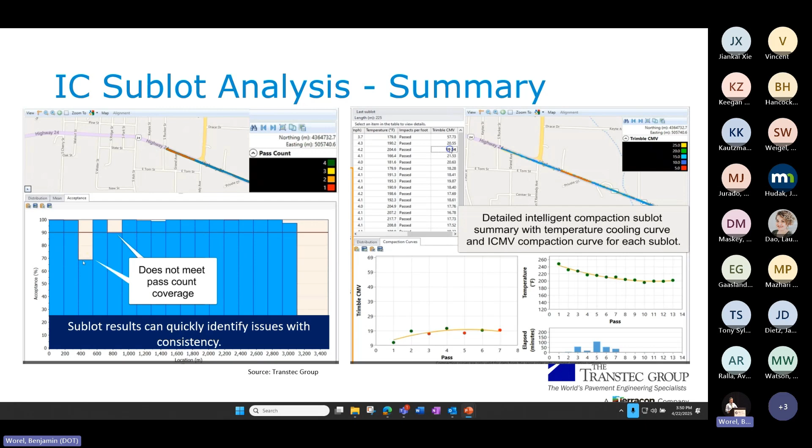Really detailed sublot analyses. There's a lot on this page, but what's neat is you can section things out into sublots. Everything's customizable. You can set some thresholds where you can quickly see pass or fail with whatever you're looking for. We have these temperature and time curves, which show your roller temperatures and time between roller passes. That's a great quality control tool. Here's one for DPS. You can see all of the general statistics. Again, you can set any sort of criteria that you want.

And then again, just really being able to leverage this information really efficiently too. To view something like this, once you import your data, you can go and click through and immediately find, okay, here's an area of low density, here's the issue. And again, in this case, it's a paver stop. When your asphalt is cooling to below 140, you're going to have density issues.

Another really great tool that's fairly new into Veta is this heat loss tool. All of the IC data is time stamped, so we're collecting temperatures on our equipment and everything is time stamped, and we're actually able to generate this heat loss curve.

If you're using both PMTP and IC data, it's going to pull all the temperature data. Time zero is going to be your temperature behind the screed of your paver, and then all of the other temperatures are going to come from the rollers.

Now, when I was quality control manager, I was obsessed with temperatures. I would want to know what it was at the plant, what it is at the truck, what it is dumped outside of the truck, what it is behind the screed, what it is at the roller. The whole thing is very, very important.

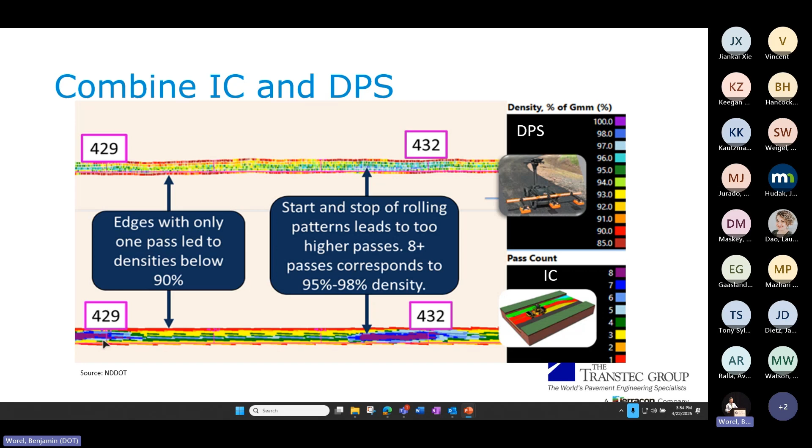Number of passes, temperatures, all of it's really important. So this just is another example of - you can see some density issues on the edges where there's only one pass, the cooling temperature from the PMTP, and then a lot of areas that look really good too.

Okay, and that's what I had. If anyone has any questions - I don't know how we're doing on time. Yeah, any questions?

The enhancements that we've added to Veta all meet AASHTO MDM-1-UL. This is a new standard, published in November 2023. MnDOT, we are the steward of it, so if you ever have modifications or anything you want added, do give us a call and let us know. We do have some modifications queued up that we'll be submitting soon. So anytime you have anything, just send it our way and we'll send that into the committee.

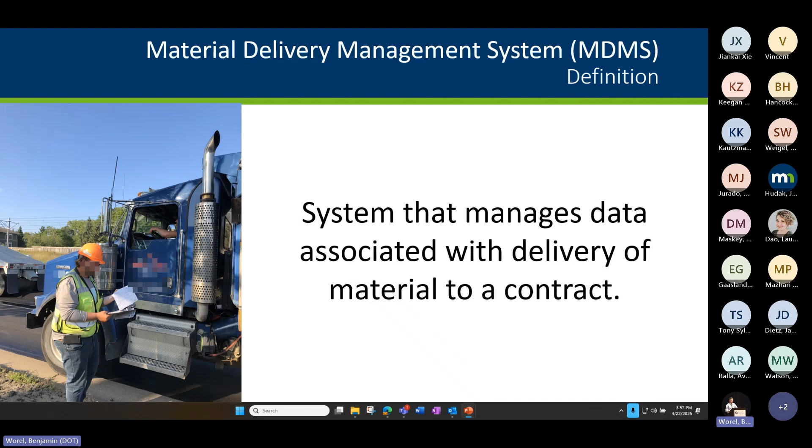So what is the Material Delivery Management System? It's exactly what the name is—just a system that manages data associated with delivery of material to a contract. What does that mean? In this provision, we're right now looking at aggregate, asphalt paving, concrete paving, and your ready mixed concrete.

This provision is written so that the specification, the standard, can grow. So as you get more material types, other things we want to add—steel, anything else—we can add to it. We did intentionally set up the structure of the standard to allow for growth for more material types. So if you have another material type you want added to the standard, let us know as well.

The data we currently have included is your source data—that's your e-ticket, your bill of lading. It's all your mix information, your weights, ingredients, if you require those whether it's bituminous or concrete. All that information's in there along with your truck ID, who's hauling it.

Table 11 in the standard is your hauler information. This is more focused on labor compliance information that every state DOT needs to be watching for, including prevailing wage rates. With that, you need to know driver names, your truck ID. It also has broker names, the company that's hauling it.

We did add permits—there was a lot of interest in overweight permits being added here too, so having that number in there. So if you want to calculate, especially for those asphalt tickets, overweight quantities, you're able to do that along with that maximum gross weight that's allowable.

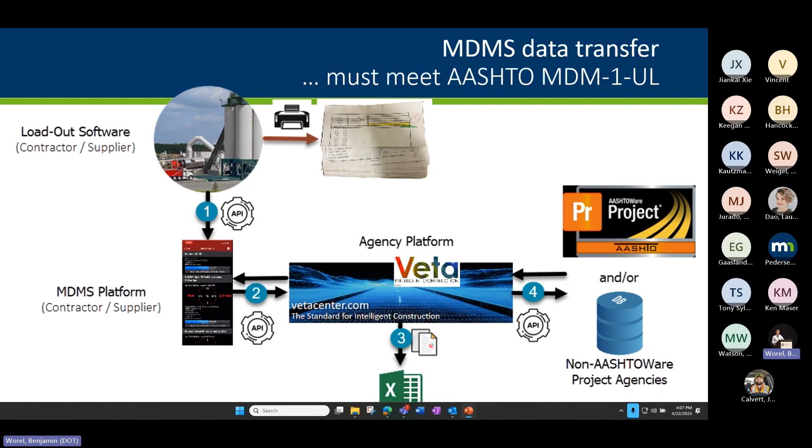So the other data that we want from these systems would be like your pay items, or if we want to connect sample IDs, for instance, or test results, being able to push that information to Veta is extremely helpful to tie to the other data sets.

So as part of it, I'm just going to float into, there's a lot of DOTs that were wanting to know what features we're adding in here for the MDMS. So these exist now. We do have a contract creation wizard.

So you log into Veta. I want to articulate, Amanda was talking about IC, thermal, and DPS -- those are all currently in the desktop Veta version, and that's being created to a web base. But the MDMS module, we created in a web-based platform right away. So this is on the web, and you'll be able to access it through traditional means of logging in.

In there, you'll follow this wizard, and you'll be able to create a new project. You'll be able to edit an existing one if you made a mistake or had additional information you need to add, or you can use an existing contract as a template for creating the next one. So it does allow us to create that top contract umbrella for all this MDMS data to be spooled to.

In there, we're all on construction -- everything's related to pay items, right? So with that, right now, it'll be an importable means of supplying that information to Veta, but eventually we will want that information pushed from AASHTOWare Project or another system. But we do have the ability of adding it through an Excel sheet here.

So with that, you'll be able to add standardized material codes, because we do know there's creativity sometimes on the contractor side, along with your pay items. The importance here is now you can tie it to each of your e-tickets and use that for payment purposes, and also as your estimated quantities for testing and sampling. So you can start cleaning up the data to create those automatic tabulation queries.

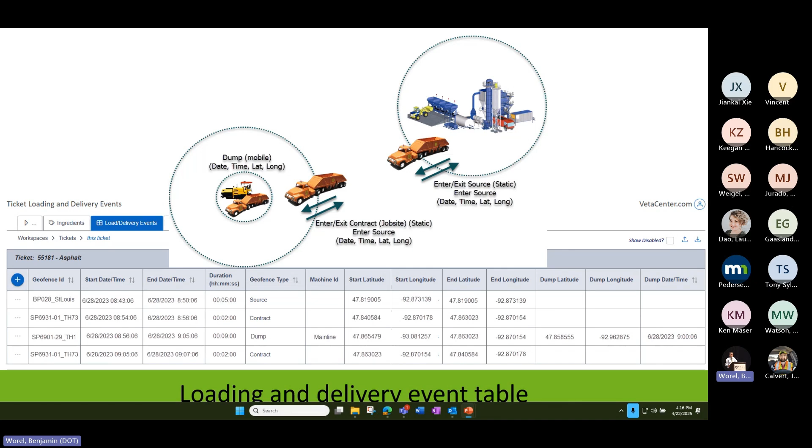In here, we will have dashboards then to help the inspectors out there. They want to know how many trucks are in transit, if you have bad weather or just to know what's expected. And then also those quantities, so in here, we'll have a summary of how many trucks are at the source, how many are in transit to the contract, at the job site, in transit back from the job site to the source, and then how much quantity has been scaled, in transit and dumped. So just kind of at the fingertips, we're making different dashboards here to help construction.

Here's just an example. This is a future feature that we're going to be adding: we do want to be able to auto record those dump locations with respect to the other intelligent construction technologies, or if this isn't associated with other technologies, you're not using them, we still want to be able to record the dump locations so that we know where the material is placed.

And then you can double click it, you can see the ticket, and then you can tie it to your lab testing. If you have failing tests in the lab or in the field, you can know, okay, it affects these trucks, and what your remove and replace limits are if you have some workmanship issues or anything else out there. Here's just kind of an example too. If you had the technologies, again, we're going to intertwine all the different data sets together.

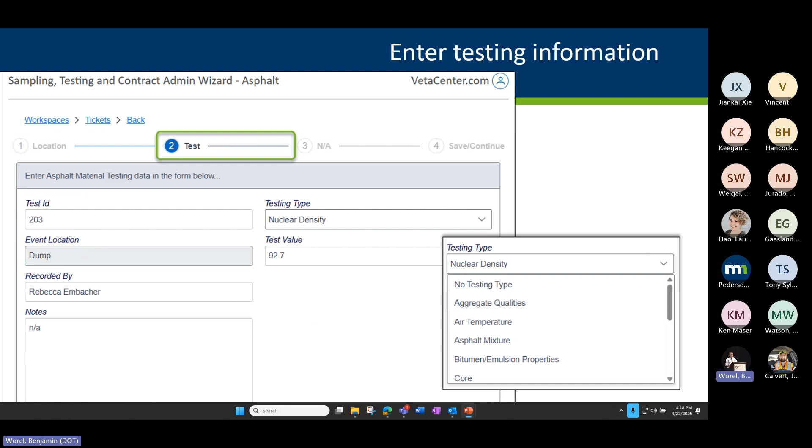Sampling and testing, we do have another wizard here for sampling and testing and contract administration. So in there, you'll be able to select whether it's a test or a sample, and whether that test or sample is done at the source or at the dump location at the job site. And in there, you'll be able to put the test ID, and then there's a drop-down list that is state-specific of the different testing types, along with the test value if you'd like to use this wizard for entry of that information.

And same goes with sampling. There's a drop-down list there as well for sampling that is state-specific. Right now, by default, we're using AASHTOWare Project for these drop-down lists for both testing and sampling, but you can modify it to be state-specific for you.

As part of that wizard, we also have contract administration. So part of the contract administration is we do want to tie it to that project category geofence out there, right? Those funding categories and control sections. So it allows you to do that manually, or if you are recording those dump locations, it will be connected to that as well to auto-populate. And then if you have to tweak it, you can manually if needed.

Also, we have different events. So when inspectors are out there, some states are requiring that they still record the full load was placed for every truck. So we do have that event in here for those states that have to manually record that. But we also have the option that it was not placed. We have seen that where trucks drive through and they don't dump the load. So then we can select not placed.

Rejected, if you had a rejected load, you can put it was rejected and what that quantity is. Partial load delivered, you notice, hey, it's not a full load here. They must have stopped somewhere on the way. And you can put that it was a partial load and they only delivered X quantity. Never arrived, wasted, and then paid for as, for those cases where you need to swap out your pay item for a different use than what it was originally planned for.

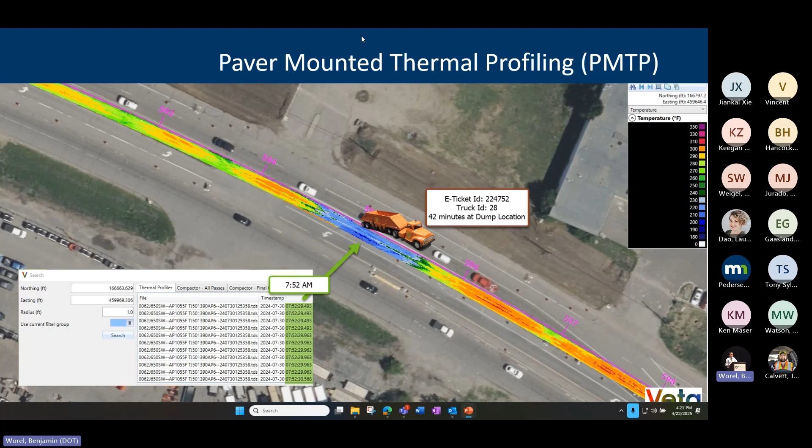So then we drilled down further into the data and we found this truck was actually at the job site for 42 minutes. So what was going on that he didn't dump right away? And then drilling down even more, and this is hard to see in the room, but basically on here you can see six loads. From the bottom up is the order that it was loaded at the source, but it actually dumped last. And it was the third one loaded in this sequence of trucks that you can see on the screen.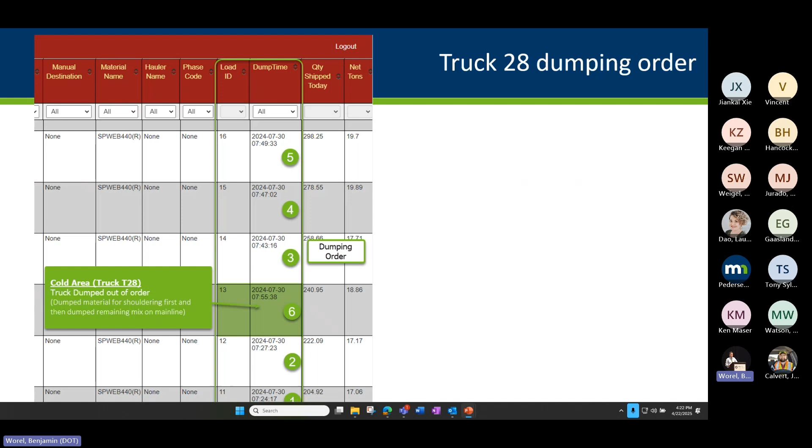And looking at the information even more, because we do have the breadcrumb trail, you could see that the truck actually split its load. The first part was paving the shoulder. It was dumped on the shoulder, and then it went to the mainline paver. So hence it was so much cooler by the time it dumped, 42 minutes later, right? So again, extremely powerful information that's now at your fingertips for helping to investigate what's going on out there. So Amanda was showing these heat loss curves.

We love those. We were super excited when we were able to get that added to Veta. So the one on the left is the heat loss curve prior to that cold segment. And you can see the first blue point there is from the thermal profiling system. So it was around 270 degrees. And then the yellow curve down below is all the temperature measurements recorded from intelligent compaction.

And so in that area there where it was warmer temperatures, again, placed at 270, compaction started around 250 to 200 degrees in the first 12 to 15 minutes. So they did a great job. And then when we got to that cold section, my goodness, it was 210 when it was placed. Compaction, in general, was 190 degrees down to 140. So that's not what you want to see out there. So again, extremely powerful tool that we can use to diagnose what's going on.

So the last few slides here is just the future. Veta, we piloted it on a couple projects last fall with success. The e-tickets were pushing just fine. We had loading and delivery event data pushing. There's a few hiccups there. It's pretty much 95% there. And I think that third-party system, that vendor has fixed, hopefully, those issues. So there shouldn't be any issues this construction season. And we are working with some other third-party systems as well that are interested in it.

So this spring, we are going to push it out on 6 projects right away here, just to make sure there's no other hiccups. And then if all goes well, we're opening it up. So if you are a state that wants to learn more and start using Veta, do let us know. If you have a third-party system, I know some of you states have purchased your system directly instead of through the contractor, do work with us to make sure that that system has done their beta testing with Veta to make sure that they are meeting the AASHTO standard so that it can push into Veta.

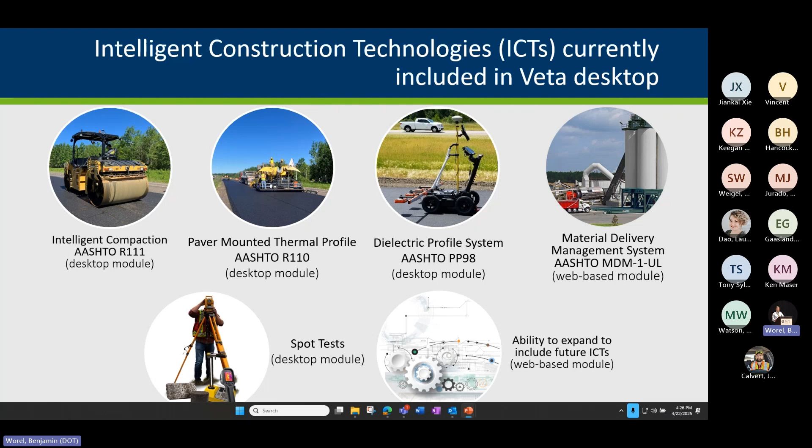And then future, we do want to bring in your GPR layer thickness data. Being able to chop it up. A lot of you are doing 3D designs. We've tricked Veta and have done the exports to bring it into Bentley and overlay it in there for 3D modeling. And so it is extremely powerful. It's just we need to clean up the data for these imports into Autodesk or Bentley. And so that's another powerful thing that we hope to use in the future as we keep getting funding for Veta, to be able to bring this layer thickness information in there and then also be able to tie it right to our 3D models.

ProVal, we want to bring in your ALR, IRI measurements in there and tie it to paver stops and so forth. Pave Cool, it'd be handy to have Pave Cool in here. So just a few examples that Amanda went through. And then just kind of the bigger picture.

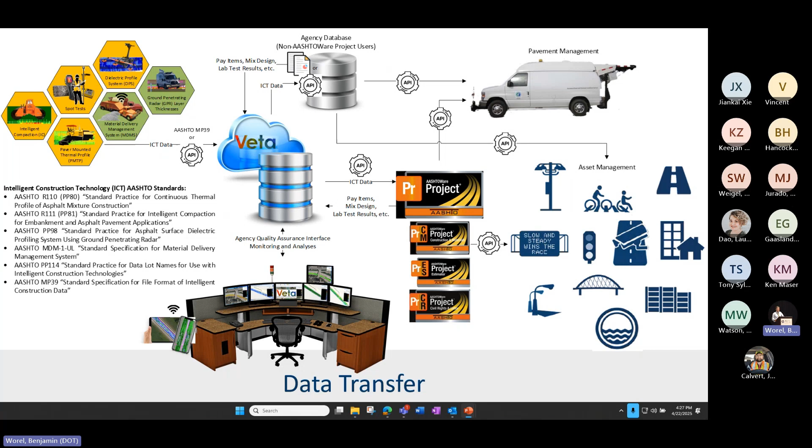Again, we created Veta purposely to have these open APIs to allow that data interoperability. So the goal is we don't want it to stop at Veta. We want it to go to your pavement management systems, right? We want it to go into your asset management systems as well. You have both the material and geometric assets from all these technologies that we should be storing and tying it to other information, and then tying to these other databases that you might have or AASHTOWare Project. So again, it's building this system so that we can share that data and integrate it with other data sets.

I was fortunate enough to work with very excellent colleagues here, mentors, and I was also very fortunate to be working on this small unit that we lovingly call the Road Doctor Program or Road Doctor Unit. The purpose of this unit is basically to introduce innovative pavement evaluation technologies to our districts and to our local agencies, and then work with them to identify the proper applications for these technologies, but also identify research gaps. And once we have identified those research gaps, we work with our partners, with the universities, with NRRA, with other national pool fund studies to solve these types of problems.

So today, I have removed all the charts, all the numbers. I will just quickly show you what we're trying to do in implementing these technologies, and what we're trying to do to solve some of the research gaps that we've seen. The two technologies that I would like to focus on are the 3D GPR on the left, and then the traffic speed deflectometer that we have recently started working with. The 3D GPR, at MnDOT we have 2 units of 3D GPR. This is a kind of newer technology of GPR.

And as you can see, since we started with the Road Doctor program in 2019, we've been getting more projects. We've been implementing this technology on more projects for project scoping. We've been almost doubling every year. So far, we've been involved in 133 projects.

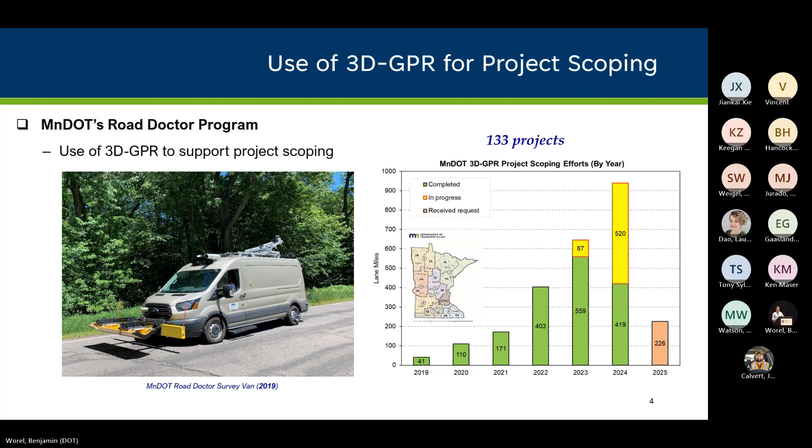So some of the key applications. Some of them are simple, but doing some research work in a lab or on a field experiment of 100 feet is completely different from applying that technology on 10 miles, 100 miles. So you need to find how to collect that data, how to scale up the application of that technology, how to process it, who is going to process it, and how it is going to be integrated in the routine project scoping processes.

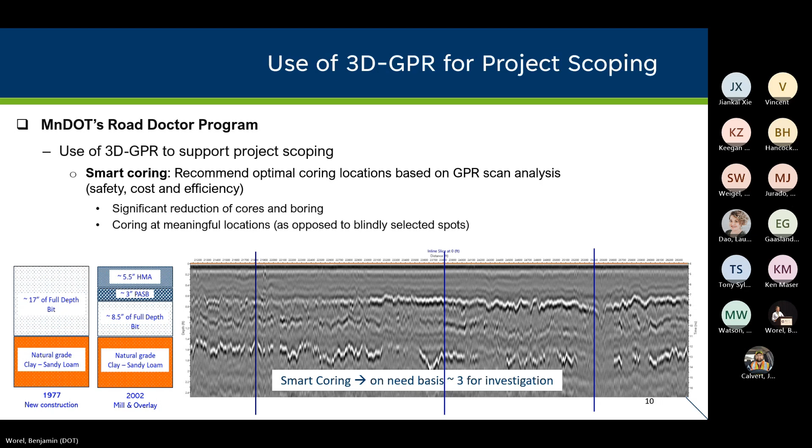The other thing is it helps with our roads when they are ready for rehabilitation. They've been there for 40, 50, 60, sometimes 70 years, and we don't always have proper documentation readily available. Some of them have been widened. There are areas that were islands, and then they have been included to become an additional lane. So most of the time, we don't know exactly what happened in certain sections.

So the GPR is also good because it can help you not only discover the transitions, but also sometimes find small pavement structures that you were not aware of. You wouldn't like to be surprised during construction, so it's good to know these things ahead.

But with all this, as I showed you before, the layer thickness is a semi-automated kind of process. But if you want to look very closely at what else is happening in your pavement, do I have stripping? Do I have delamination? Do I have debonding? Yes, it can be done with GPR. As I can show you here, the GPR really gives a good picture of what's happening underneath your pavement. One thing is seeing these things. The other thing is looking at 100 miles of road and finding all these problems, all these sections, visually. That becomes very difficult.

It's like looking for a needle in a soccer field or football field, so visually doing this becomes very difficult. Because of that, we do implementation, but also we work with our partners, with other state DOTs. One of the limitations that we have with the GPR is basically automating the process of finding areas which are damaged, like stripping, delamination, or other types.

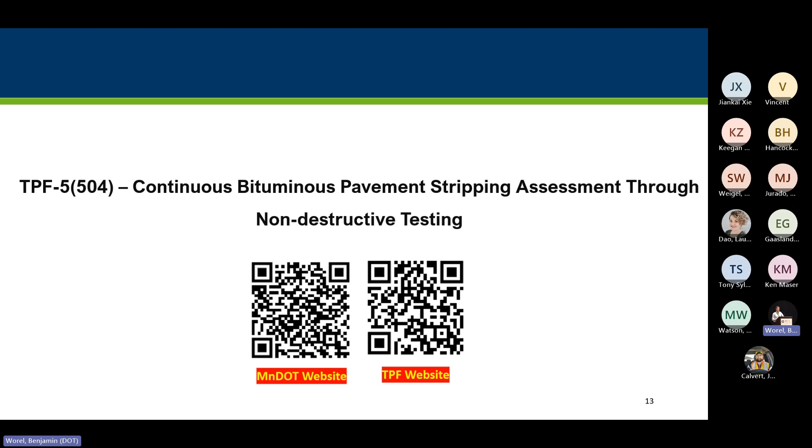So with that, we created this pooled fund study called TPF-5(504). The name is very long and not necessarily the best: continuous bituminous pavement stripping assessments through nondestructive testing. If you want more details, please look at these websites. We do have the MnDOT website and also the National Transportation TPF website. I'm going to keep it simple and just give you the highlights.

We have, I think, 10 states and federal highway along with us. What we're trying to do is basically a proof of concept. One is by Ken Maser, and the other, which we developed in-house, is basically using the GPR data and coming up with an automated way to tell you where you have stripping issues, where you should be investigating further. And when you have stripping issues, most of the time it's not only bituminous pavement.

Our colleagues in Illinois, when they have concrete overlaid with asphalt, still have that problem on the joints. That's the reason we try to cover as many different states so that we can cover different mechanisms of stripping, different kinds of deterioration, different kinds of problems underneath the pavement. For us, most of the time it's with full bituminous pavements, but we do see stripping and other types of delamination in all sorts of pavement.

So what we're trying to do with this study is, first of all, come up with an automated way of finding the stripped area, to make that process very easy. Once that process becomes automated, it will also become easy to put it on Veta and other types of platforms.

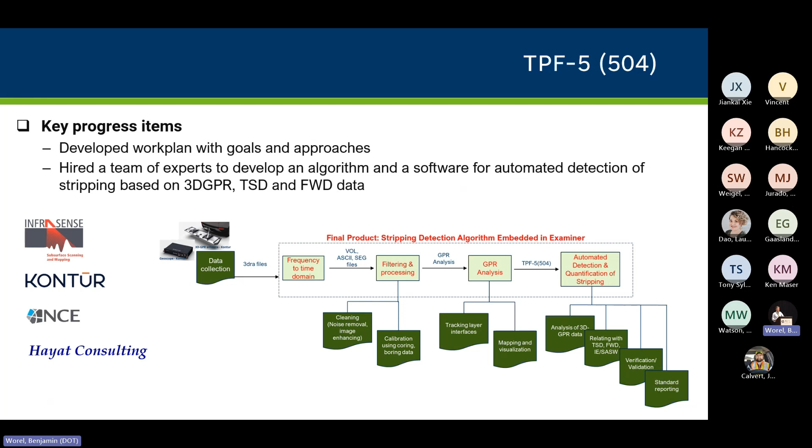We want someone to develop that process and put it in a commercially available software like Examiner. So we found a team that agreed to do that, and right now we are working on that. The team is composed of Infrasense, Kontur, NCE, and Hayat Consulting. They are first coming up with a mechanism, an algorithm to automatically find those areas, and then will work with Kontur to put it on Examiner so it becomes available to more states.

To help with this study, last summer we built 12 test sections in MnROAD. In those test sections, we created artificially stripped elements and hid them in the pavement. The idea is to see if the GPR can find them, and then use this data to train the algorithm.

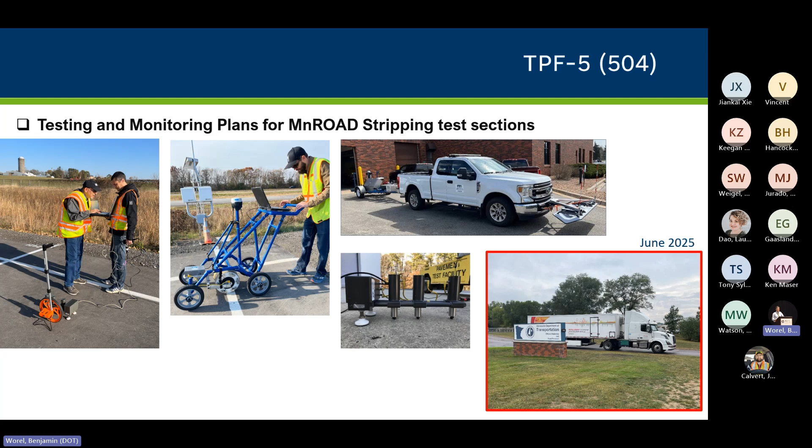The algorithm uses GPR data, and not only GPR but also TSD data, impact echo, and FWD data, to train the algorithm so it can then be applied on actual roads. As you can see, we're already very happy because the GPR can detect these hidden elements. Now we're working with Ken Maser to come up with that algorithm.

Once that algorithm is ready, we have already identified several roads in all the states that are members of the pooled fund study, so we will be applying and validating the algorithm on these roads. We will have two phases: first, creating and developing the algorithm, and then validating it and packaging it in the Examiner software.

The other technology we are looking at is the traffic speed deflectometer. As you know, using pavement deflection to come up with mechanical properties of pavements, or their strength, has been known for a long time, and it's quite a straightforward type of analysis.

But measuring deflection has been very challenging over the times. MnDOT started measuring deflection a long time ago, in the 40s, when we had basically a plate bearing test. Then we moved to the Benkelman beam, and we've been working with FWD. Most of you are familiar with FWD.

But lately, like many other states, we've been interested in this traffic speed deflectometer because, first of all, it allows you to collect data on miles and miles of road without traffic interruption. And it is a non-destructive type of test.

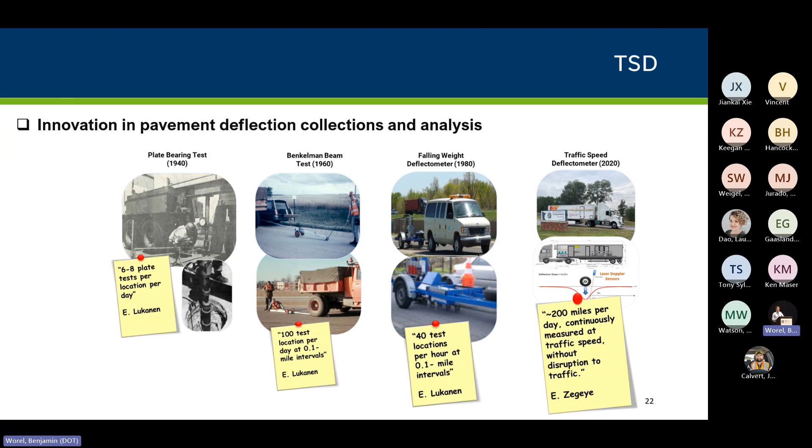The main difference with TSD is that it does not measure necessarily deflection. It measures the slope of deflection, but then it can mathematically convert it to deflection, and then you can have continuous information of your pavement structure. So we've been interested in this TSD.

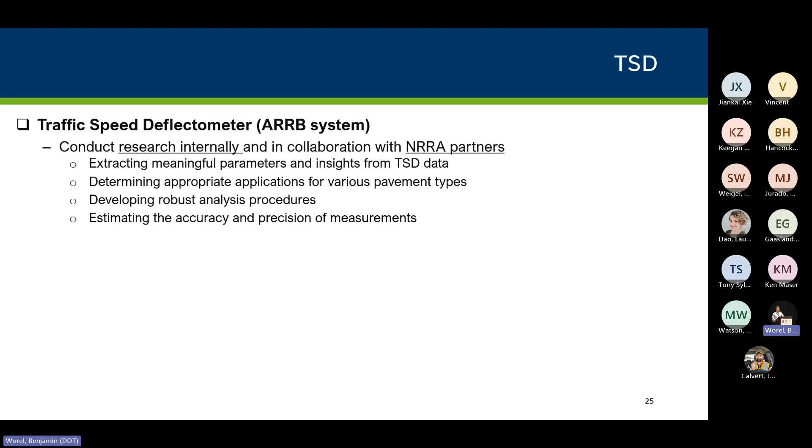We are also working with our partners and internally to do some research on how to use this data. We're trying to see how we can extract meaningful parameters, find appropriate applications, and develop robust analysis procedures. We're also looking at estimating accuracy and precision. I believe tomorrow Soheil will talk about the work we're doing with him on finding accuracy and proper application for TSD.

The other work we're doing internally is repurposing the use of software. We have a software that was developed for back calculating layer moduli from FWD data, so we're trying to repurpose that also for the TSD data. One of the challenges of the TSD data is that we have thousands of data points coming in, so we need a software that can help us analyze or back calculate TSD data, which doesn't have to be completely rigorous. We're trying to find a fine balance between rigor and practicality.

And MnPAVE, because it allows you to analyze data coming from 100 miles in 15 minutes, we're trying to repurpose that for the analysis of TSD data. In this paper, coming soon in the TRB journal, we found some of the limitations of the current MnPAVE, but also some of its strengths. We're going to work with our partners and other researchers to surpass those limitations and make sure that MnPAVE can also be used for TSD data.

Other key studies - we are also working with Ken Maser, trying to apply GPR for evaluation of concrete pavement. One of the things we're looking at is misplaced or misaligned dowel and tie bars. The technical liaison here is Dai - you can jump in if you want to add something.

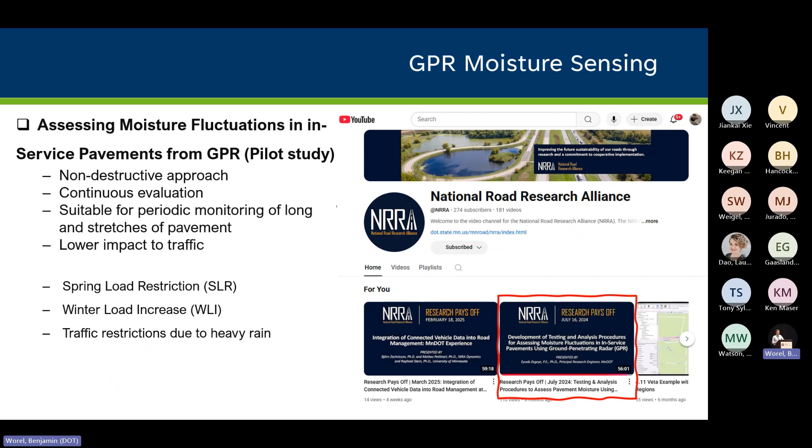Based on that study, we are now looking to continue the work, and we just hired Iowa University and AED to help us implement the use of GPR for assessing moisture and foundation conditions in in-service pavement. This will be, in my view, very important to help us use GPR to tell us when is the right time for spring load restriction, or when it's the right time to open a road that's been closed due to high rain. Right now we do have good tools, but sometimes they are one-solution-fits-all. So if we can use GPR to also assess moisture in service pavement, that will be another cool thing.

So this is another project that is being finalized - they're working on finalizing the work plan, but it will be soon. So Kyle, this is the update of what we do. Thank you, and sorry I held you long.

Any questions for Eyoab? Okay, thank you. Thank you very much.